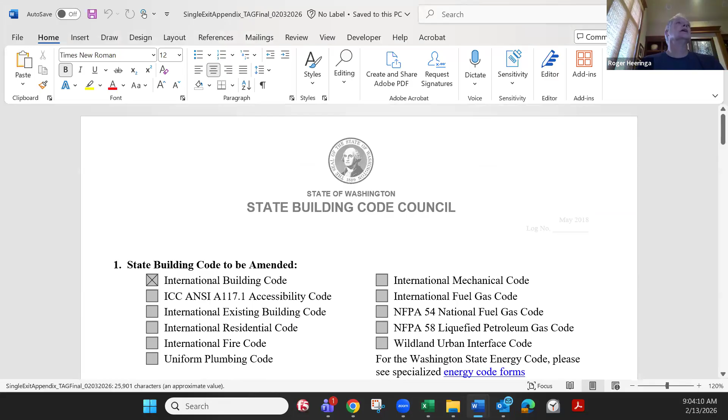All right, agenda item 4, which is the 2024 IBC single exit appendix. I have a couple of introductory comments. For those who have not been involved, it is critical that we understand that the single exit is a change to the International Building Code. The multiplex is a change to the International Residential Code. And trust me, in our TAG, there were a whole lot of conversations and people got mixed up. Everybody got mixed up at least once, if not multiple times.

So just be clear that as we talk about the single exit provisions, which will be first, that's a change to the building code. And then when we get to the multiplex, it's the residential code. Second item I wanted to do, and I just kind of wanted to get this out there, out into the public. Dustin and I did a little bit of looking back, trying to get an estimate on the number of hours that was put into the production of these two

appendices that we've proposed. And just meeting times, we went back and looked at attendance. We had roughly 100 hours of staff time in meetings, and we guessed at about 500 hours of volunteer time. That is only the time spent in meetings. I would suggest to you that the staff time in creating agendas and minutes and managing documents might very well be double that. Call it 200. That's my back of the napkin guess. And there was certainly significant time put in by some individuals outside of the meetings as well.

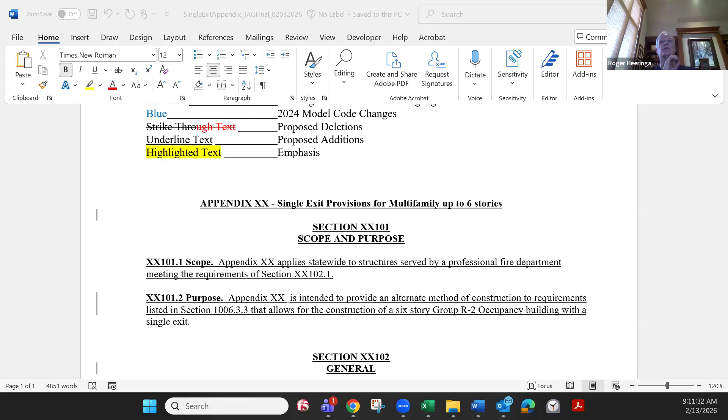So one of the things that we did is we've upgraded the sprinkler system from the residential sprinkler system, which is the NFPA 13R, to a commercial NFPA 13. So the sprinkler system is enhanced. And I'm not a sprinkler expert, but I believe there are more heads and more flow, both. So if you're going to go from 3 stories to 6 stories, you're going to need to do, call it the commercial, the 13, not the 13R sprinkler system.

We have Roger, can I ask for a clarification? When you said go from 3 to 6, it's go from 3 to 6 with a single exit, right? Yes, exactly.

We have added that there are EEROs, emergency escape and rescue openings. It's basically the window that you can break out or have access from a fire. We've required those in all sleeping rooms. There was discussion about that, but that was an upgrade.

We have the stair and elevator shafts have to be pressurized. If it's the only exit, we think you need to pressurize that shaft so the smoke does not get into it.

We have upgraded the smoke alarm and fire alarm systems to notify residents of fire in other units, particularly in the corridors. If it's the only exit and there's a fire, we think that residents need to be notified. So we've upgraded the smoke alarm and fire alarm systems.

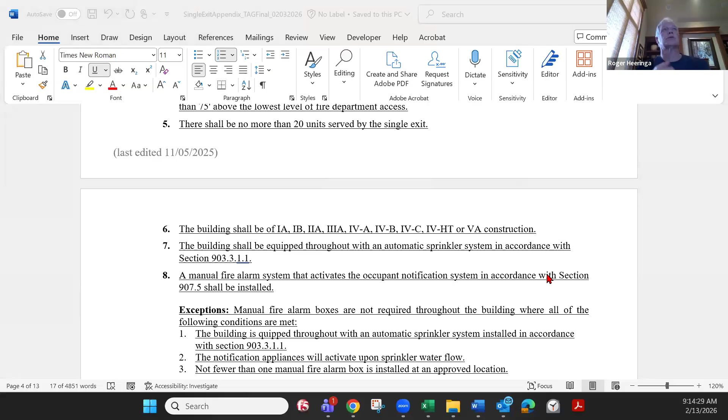So, for instance, if you are 6 stories, the first story single exit would serve the top 5 stories. We have a figure that kind of shows that. That would be 20 units. So you would have 5 stories at 4 units.

If you want to go to 4 stories served by that single exit, you can have 5 units. And to be honest, the way this is worded, if you wanted to do 3 stories, you could do 6 units if you went through the upgraded sprinkler systems, pressurization, and all of that type of stuff.

So with the purpose of the RCW to really improve or allow for infill sites to produce more units, build more units, and make it more cost effective to improve housing, we felt like giving people that flexibility at 4 stories—I think 5 stories would still not work, but at 4 stories and maybe even 3 stories—it does allow everybody a little bit more flexibility.

So that's the high level enhancements from a code perspective, and then the change that we made to where this appendix can be applied.

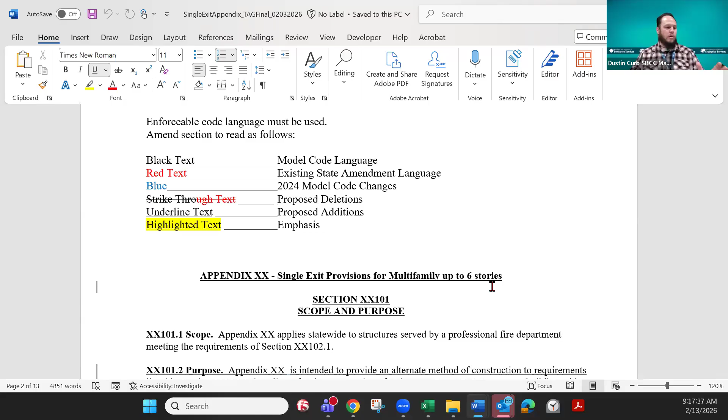You also won't see any strike-through text on this one because this is all brand new language, and any emphasis has been removed from this document. So all that you're going to see here is underlined text. There are some sections underlined as part of the draft work for insertion in the code books that'll be published. But for our purposes, underlined text represents brand new code language that we're bringing to this appendix—not for emphasis, just showing that it is new for us.

So Dustin, the document starts with the appendix, but towards the bottom there's some charging language in the code and the WAC that directs you to this appendix. Do you think it might be better to hop off there? We as a group worked with the appendix first and then developed the pointer language. I actually like the pointer language first, Dustin, it's clear in my mind.

All right, I scrolled past it. So first we have WAC 51-50-003, and you'll see the red text signifying an existing state amendment, with strikeout for the 2021 edition and new text for the 2024 edition. We are just adding a pointer here. This is where we talk about what is adopted for this WAC applicable to the International Building Code adoption in Washington. In 003, and all of the codes, it says we adopt this edition, and if there are appendices adopted for use within that text, it's mentioned here too. So at the end of this one, we are updating Appendix XX.

It's labeled XX because we're still drafting all the CR 102 stuff, and this one is going to get slotted into the best place that fits with the rest of the appendices being drafted. There are several Washington appendices, some amended appendices that Washington has amendments to that are model code text, and the appendices have been reorganized in the 2024 edition. As we're drafting this, the XX will get updated to a two-letter designation that puts it in line, most likely at the end of all the existing appendices, ready for use.

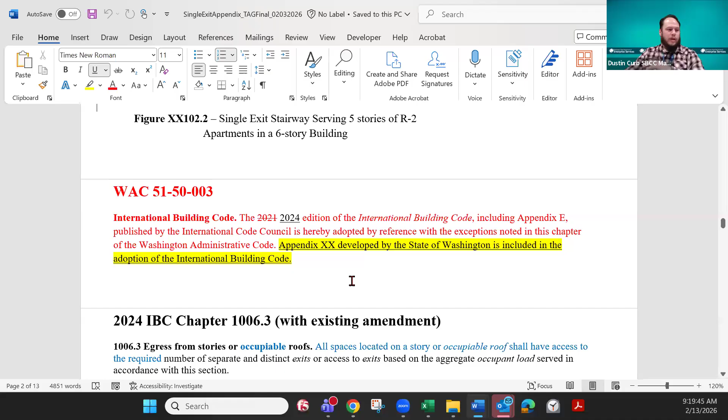So that just signifies we have this appendix available. In the main body of the 2024 IBC, chapter 1006, which is an egress chapter, we've shown the black text as model code, and the blue text showing 2024 code updates compared to the 2021 code. Most of this is left unchanged as far as model code text goes for 2024, but we get to the single exit section, where we have an existing amendment regarding the portion of the building served by the single exit.

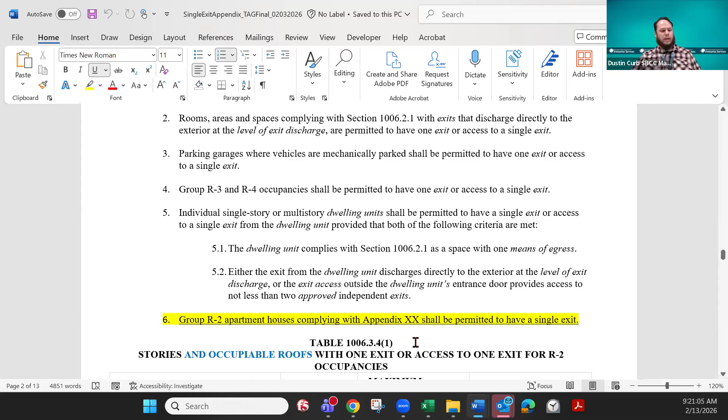This wasn't changed by the single exit multiplex housing tag, so it stays the same. The addition is a new condition, not exception, that allows a single exit if it exists. In accordance with the legislation, Group R2 apartment houses complying with Appendix XX shall be permitted to have a single exit. This is just a pointer within the building code, because this appendix is intended to be adopted for use statewide, not as an optional local adoption. So if you have the condition of Group R-2 apartment houses, you'll be allowed to design per Appendix XX if you choose. The remainder of 1006 is included for discussion among the tag, but there's no further modification within IBC 1006.

We also have the same text in the 2024 IFC. We have the existing state amendment for condition number 1, and similarly we've added condition number 6, which just points to the International Building Code Appendix XX for single exit. This is just a correlation - the exiting and several other chapters within the IFC and IBC are identical, so if we have amendments in one, it's prudent to bring them across in both texts.

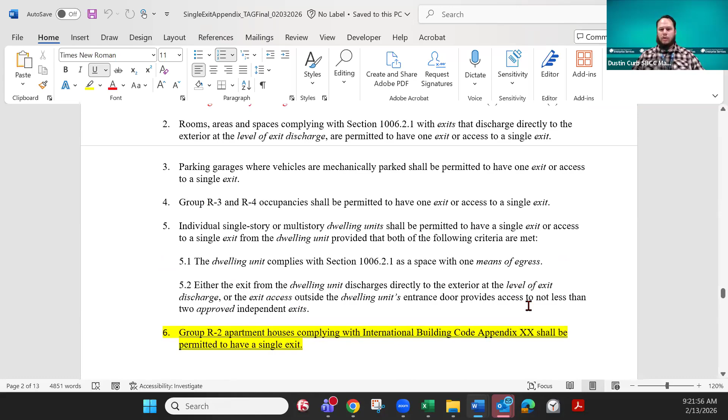And those are the priming language and pointers within the main body of the code. Now I'm going to hop back up to the top of our document and start at the beginning of the appendix.

So we have section XX101, which is the scoping and purpose of this one. There was discussion about user notes and things like that - they typically are placed before chapters or appendices, but it was thought more prudent to bring language from those into the actual code text, since user notes are considered commentary and not necessarily enforceable. So we brought that language down into scoping, and it's filtered into a couple other sections as well. There are folks on the call, so if I missed something, please raise your hand - I'm trying to keep an eye on that too. But we brought user notes into the main body to make it all enforceable language.

So looking at the scope, you'll notice that 101.1 Appendix XX applies to structures served by a professional fire department meeting the requirements of 102.1. That is one of the key things we talked about, had lots of discussion on, was professional fire departments and what that means. We talked about different methods and metrics to apply to those fire departments to make sure we'd get the level of service needed to respond to an emergency in a structure of this type of design. We'll get to what those criteria are in section 102.

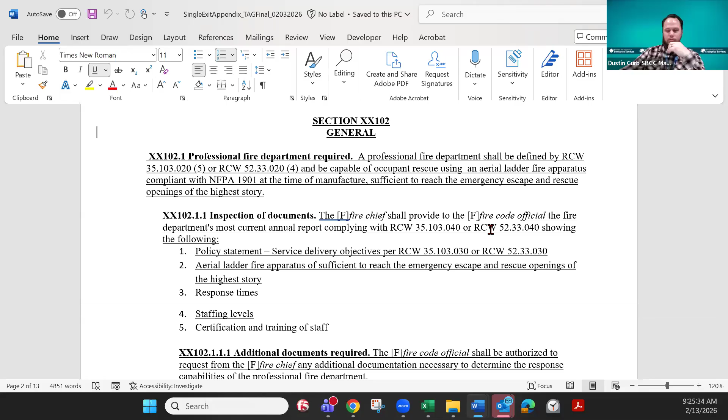When I hear aerial ladder apparatus, sometimes I mistakenly think it's probably a helicopter or something coming in. But correct me if I'm wrong, any of the fire guys on this call, an aerial ladder is just a ladder truck that you used to see in the cartoons. It might have two drivers, one driving the back and the front, but this is capable of getting you to that sub high rise level of rescue in a building. Is that accurate? I see no hand. Awesome, thank you.

As far as being a professional fire department, there are documents that show this to the state, and we have some documents that the local fire code official would be seeking from a fire chief who is responsible for conducting emergency operations in the territories of construction like this. So we have policy statements capable of having the aerial apparatus available within proper times of these structures, appropriate staffing levels, and certification and training of staff.

If upon submittal of all those documents there might still be a question by the fire code official, additional documents are available to be requested, and those are left to the discretion of the fire chief and the fire code official to work out, to make sure the level of safety is maintained. I think the big concern here is that if the fire department is unable to respond to a structure designed like this, significant loss of life and property can occur. So we want to make sure we're able to respond appropriately.

I'm seeing some shifting stuff.

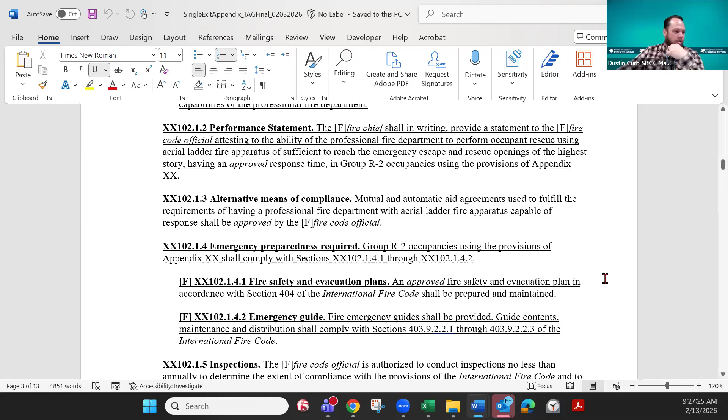In here we have more about the documents, the performance statement, alternative means of compliance. So we talk about mutual automatic aid agreements. If a local jurisdiction isn't capable and they have an agreement in place to bring resources from outside of their immediate area that can respond as appropriate, that's okay, as long as everybody's confident that the need is met.

There's inspections in here. The fire code official is authorized to conduct inspections no less than annually to determine extent of compliance with these provisions. If some of these exit ways are blocked by stuff put in the hallways by residents, trash pickup, etc., it could lead to reduced egress pathways and increased egress times. Maintaining these buildings in a safe manner is prudent as well, so inspections are authorized by this appendix.

Then we get to the single exit in a group R-2 apartment house. In addition to the means of egress requirements of Chapter 10, not more than 5 stories of group R2 apartment houses are permitted to be served by a single exit under the following conditions.

This is where the bulk of the design considerations are spelled out for what is needed in a single exit building. We've touched on number 1, the building has not more than 6 stories above grade plane, and we have a user note in here to clarify that further.

The 5-story limitation in section 102.2 does not prohibit an R2 apartment occupancy from being located on the first story of a 6-story building. For a 6-story building with a single exit stairway, the R2 apartments or other occupancies are permitted on the first story, provided the required means of egress for the occupancies do not commingle with the ones coming down from the levels above.

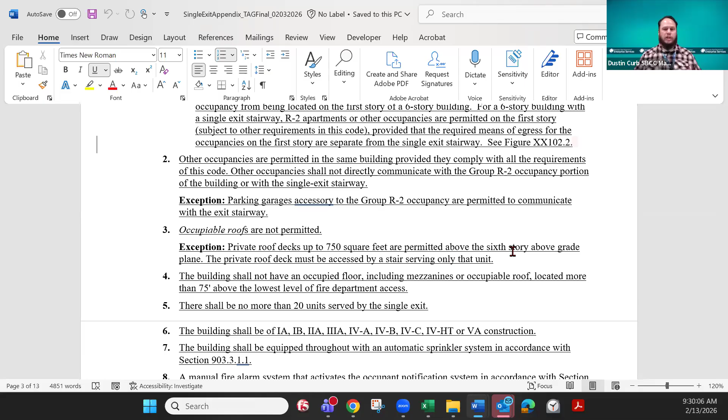Number 4, the building shall not have an occupied floor, including mezzanines, or an occupiable roof located more than 75 feet above the lowest level of fire department access. This is a prohibition on high rises and is where that aerial ladder apparatus threshold lies.

So if you go above this, the ladder trucks can't get to you. And I guess you're using the old jump out the window and trampoline tactic if you have to, but we're not allowing that.

The building shall be equipped throughout with an automatic sprinkler system in accordance with section 903.3.1.1. For those who might not know, 903.3.1.1 is the NFPA 13 sprinkler system that Roger was mentioning earlier.

With this one, I believe you can go higher in the building. You get better coverage with the sprinkler heads as compared to the 13R systems, which were the second option discussed for these buildings. Making sure I didn't mess anything up on that sprinkler statement from the fire folks.

All right, seeing no hands, I will assume that it's a good one. So the manual fire alarm system that activates the occupant notification system shall be installed. This is an upgrade as compared to what would be allowed in a 2-exit building of the same size and height. They're not required throughout the building where all the following conditions are met.

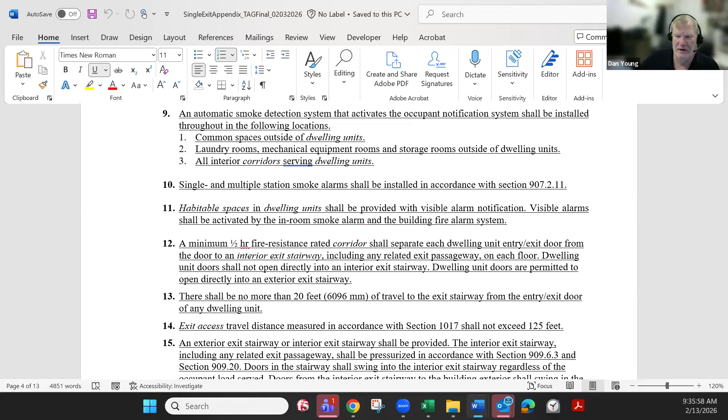Yeah, it allows for a lot of other trade-offs. Yes, very good clarification. Thank you.

Give me one moment, just updating some notes. All right.

Looking forward, number 10: single and multiple station smoke alarms shall be installed in accordance with 907.2.11. Number 11: habitable spaces in dwelling units shall be provided with visible alarm notification. Visible alarm shall be activated by the in-room smoke alarm and the building fire alarm system. This is an upgrade to bring more awareness by occupants of these buildings to potential emergent situations.

Number 12 is talking about corridor protection. A minimum half-hour fire resistance rated corridor shall separate each dwelling unit entry exit door from the door to an interior exit stairway, including any related exit passageway on each floor. Dwelling unit doors shall not open directly into an interior exit stairway, but are permitted to open directly into an exterior exit stairway. This is just talking about corridor protection.

There shall be no more than 20 feet of travel to the exit stairway from the entry exit door of any dwelling unit. This prevents overly long corridors to travel to the protected exit stairway shaft, gives plenty of occupant time to get there, and shouldn't lead to dead end corridors as well.

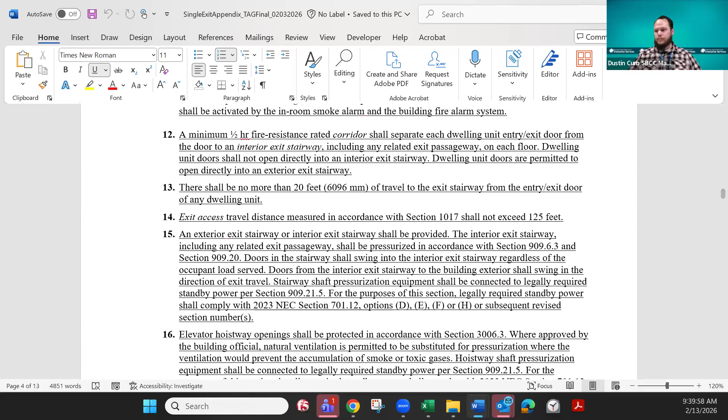So this legally required standby power brings some redundancy to the operation of the smoke pressurization system to ensure that exit shaft remains clear. It creates that pressure differential within the shaft of a higher pressure that when the doors open, it should also help close those doors. But when they are open, air will escape from the passageway, pushing smoke and other contaminants in the air out.

Elevator hoistway openings shall be protected in accordance with section 3006.3. Where approved by the building official, natural ventilation is permitted to be substituted for pressurization where the ventilation would prevent the accumulation of smoke or toxic gases. Hoistway shaft pressurization equipment shall be connected to legally required standby power per 909.21.5. For the purpose of this section, legally required standby power shall comply with 2023 NEC sections that were listed earlier.

So where the elevators come down and you have the hoistway opening and closure, those are required to be protected as well to prevent undue exposures to the exit passageway. The exit serving the Group R occupancy shall not discharge through any other occupancy, including an accessory parking garage. So the parking garage is allowed to communicate, but you're not allowed to discharge through the parking garage to the public way, ensuring that you don't get trapped in other places where you're trying to egress through.

The exit shall not terminate at an egress court where the court depth exceeds the court width unless it is possible to exit in either direction to the public way. This just ensures that if you come out in a slightly confined space, that you still have adequate egress capacity to get to the public way.

Openings within 10 feet of an exterior exit stairway or non-rated exterior walls of the interior exit stairway enclosure shall be protected by opening protectives having a fire protection rating of not less than 3/4 hour. This is just to protect the exit stairways from adjacent exposures that might occur with building configuration. And then emergency escape and rescue openings shall comply with section 1031 and shall be provided in all sleeping rooms on all floors served by the single exit.

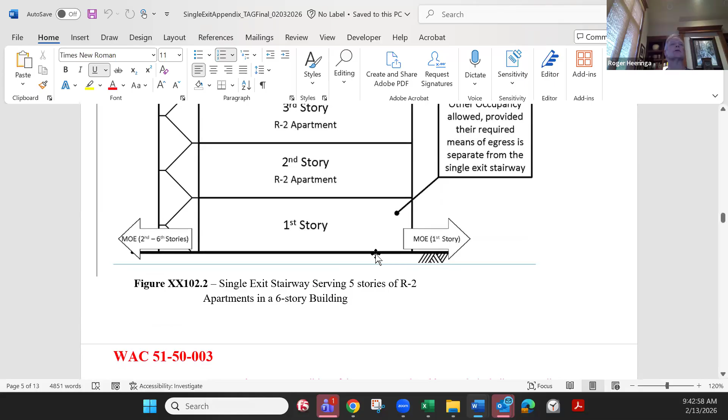Dustin, the note on the right, I might mention as well, there was conversation on the enforcement side of is it clear that you can have residential units on the 1st story, or is it interpreted that this is a podium with no residential on the lower level? That was not the intent. So we very clearly said that R2 apartments or other occupancies are allowed. So just wanted to make it really clear that R2 apartments are allowed on the 1st story.

And John Sue, you have your hand up? Yeah, and there's a user note further up that kind of points to this figure that tries to explain the same thing in words. And this points to figure XX102.2. Yeah, and as Roger said, there was some concern about, does this mean I can't have apartment units on the ground floor? And the idea is, yes, you can, but they have to exit separately. So they can't use that single exit as their required exit. Yep.

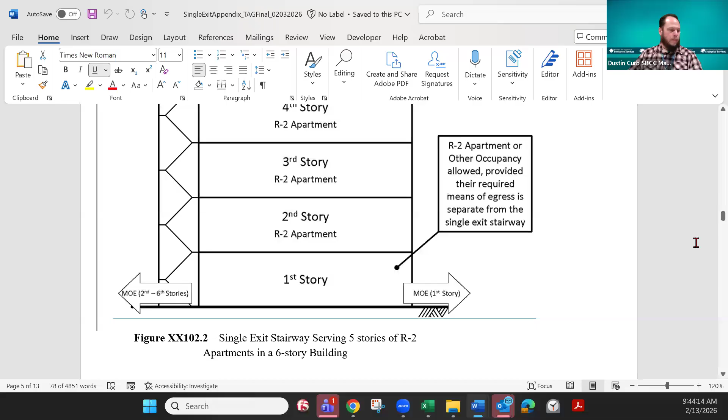And that does, I believe, bring us to the end of the proposed new appendix for the building code. We went over the WAC 51-50-003 and the changes proposed there, and the proposed changes in the IBC Section 1006 and IFC 1006 as well.

Scott. I think I know the answer, but I'm going to ask it anyway. So on the ground floor, secondary exit still could not exit into the stairwell, correct? Correct. Okay. If I can answer that, if it's a required exit, it doesn't mean you can't communicate with it. You can have a door that goes into the stair on the ground floor. It's just that it can't be the required exit for that ground floor. Thank you, John.

Todd? Thank you. Just for the purpose of the meeting, can someone just quickly walk through how one with a couple of the likely construction types would achieve that sixth floor and horizontal separation and so forth? There are many. I mean, I think that the standard one, the standard, Roger, I'm sorry. I guess the question is, are there any special provisions that are different than the base code?

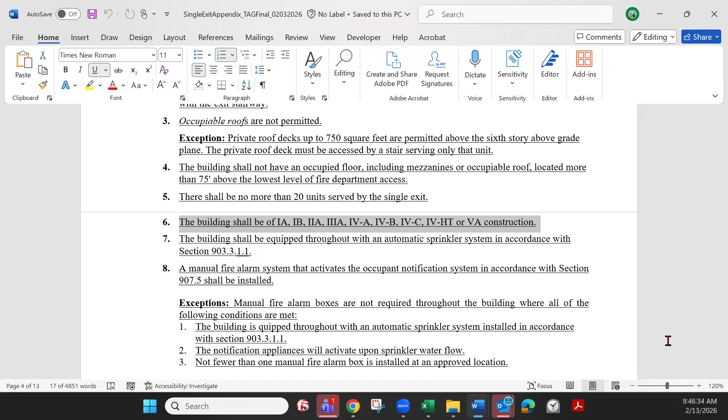So again, you asked about what are some types. I think everybody, particularly at the beginning of the process, thought of this as a one-story concrete podium with 5 levels of wood on top. But there is a lot of conversation about, well, we could use different systems, certainly mass timber, cold-formed steel. There are different construction types that could be used for this. So that's where we came up with this list of allowed construction types. And somebody also have to help me with what we excluded. But those that we excluded were pretty clear.

But a 2-hour horizontal separation was never discussed? No, no. Okay. That would be per code. And John, you raised your hand. If you could help answer. Yeah. In answer to your question, Roger, what was excluded were type 5B, type 3B, and I think 2B. Those are basically non-rated types of construction. We wanted to make sure there was at least 1-hour rated construction in the building. But everything else is, you just go back to base code provisions.

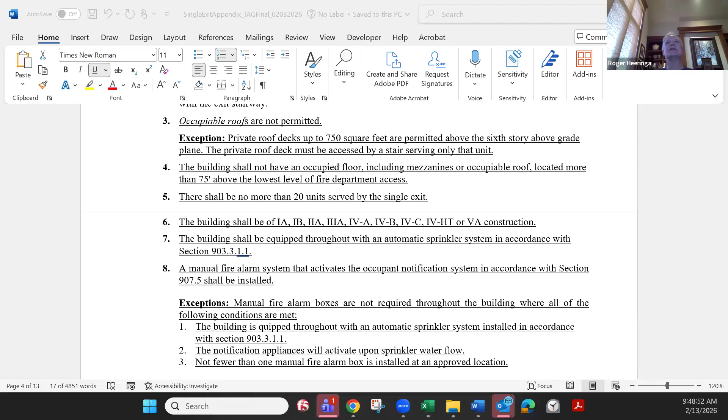Attendee. Ken, go ahead. Could you scroll up to 102.1.1, number 2? I just think that you need an editorial cleanup on that. Either get rid of the word of or put sufficient aerial ladder apparatus to reach, something like that. But number 2 just doesn't flow correctly. So you would propose to remove that of? The simple aerial ladder fire apparatus sufficient to reach. Yeah, you could say sufficient aerial ladder fire apparatus to reach. So either one, but I just think this needs to get cleaned up. That seems like a reasonable grammatical edit. Anything else?

Well, then I would be ready to ask for a motion to move this on to the full council for consideration. I'd like to make a motion to move this as presented to the full council. Thank you, Nan. Second. Who is the second? Me, Scott. Thanks, Scott. Any further discussion? I will clarify, this will move on to the full council and then it will go into the CR 102. So there will still be an opportunity for full public comment on the proposal. Any other discussion? All those in favor say aye. Aye. Aye. Any opposed? Okay, motion passes.

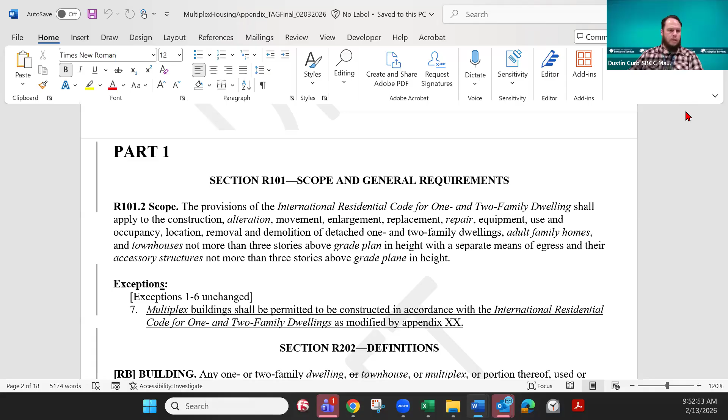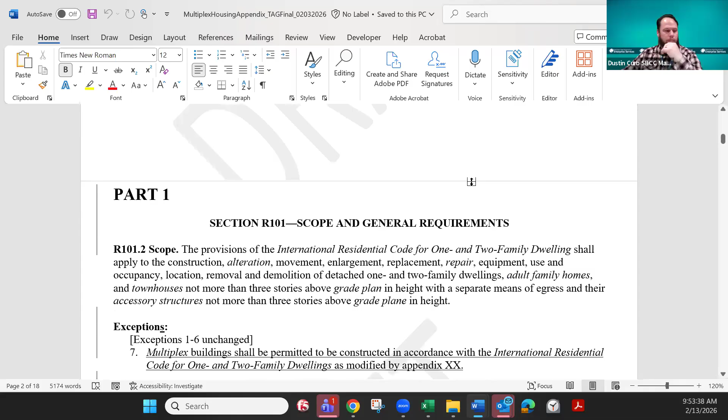I think, Dustin, maybe we jump right into it. Okay. And let me start with our pointers to the appendix first again. Well, maybe we don't have them. So we've been working on pointers for stuff out of the building code as well, or the building code TAG. So I might have conflated that a little bit. All right. So Appendix XX, multiplex buildings. This is intended to provide... John, go ahead. Sorry, Dustin, the pointers are in part 1 above. Oh, thank you, John. I missed it completely.

All right, so part 1, section R101, scope and general requirements. We have a change to the 101.2 main body code language, just bringing in a new exception, which allows that multiplex buildings shall be permitted and constructed in accordance with the IRC for 1 and 2 family dwellings as modified by Appendix XX. Once again, Appendix XX is just a placeholder for the final lettering, number, name that we're looking for on this drafting.

Within the main body of the code, we amended one definition and added another. So the definition of building adds multiplex into that definition. So any 1 or 2 family dwelling or townhouse or multiplex or portion thereof intended to be used for human habitation for living, sleeping, cooking, or eating purposes, or any combination thereof, or any accessory structure. And then a multiplex is defined: a building of up to 3 stories containing 3 to 6 dwelling units consolidated into a single structure with common walls and floors. And those are all the pointers we have in here.

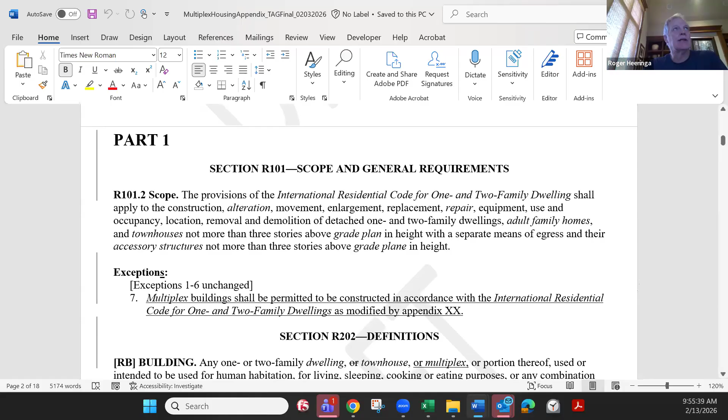I do suspect that a WAC 51-51-003 amendment should be considered. We do have some sections in the code that talk about where we would place this appendix as available for local adoption. This one's not mandatory across the state, if I recall correctly. Is that right, Roger? No, it is mandatory across the state. Okay. Then that's my bad. I think in the conversation that we had, we felt like if these changes are made to the IRC, that is clear enough that it allows statewide, you can build these on the IRC. Okay. Then I will move forward from there.

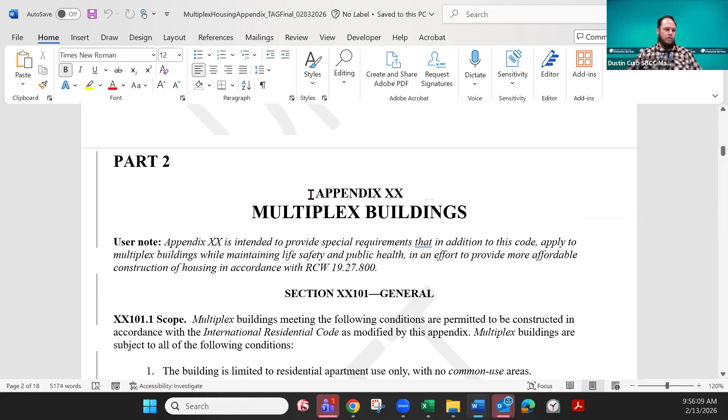Getting into part two, the actual appendix language. We have a user note on this one. This one's intended to provide special requirements that, in addition to the base model code, apply to multiplex buildings while maintaining life safety and public health in an effort to provide more affordable construction of housing in accordance with RCW 19.27.800, which is the location of the bill that passed that directs the SBCC to create this multiplex appendix.

Getting into section XX101 for scope. Buildings meeting the following conditions are permitted to be constructed in accordance with the IRC as modified. Multiplex buildings are subject to all of the following conditions. The building is limited to residential apartment use only with no common use areas, with an exception that common use areas used for means of egress, bicycle parking, mail packages, shared laundry, or trash bins are permitted where such areas are separated from the rest of the building in accordance with XX103.3 or 104 as applicable. The total floor area of the building shall not exceed 8,000 square feet.

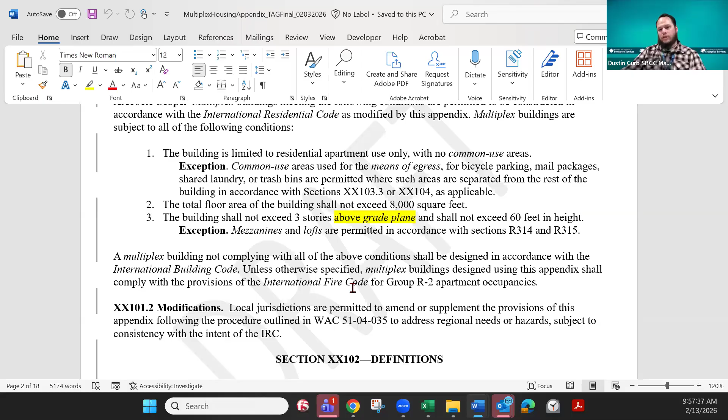The building shall not exceed 3 stories above grade plane and shall not exceed 60 feet in height, with the exception that mezzanines and lofts are permitted in accordance with sections R314 and R315. And Roger, correct me if I'm wrong, I think since we don't have the egress type requirements from the International Building Code that we're bringing into this one, the square footage limitation was kind of where we addressed the egress travel distance on this one. Yes. Okay.

And then further, a multiplex building not complying with all of the above conditions shall be designed in accordance with the International Building Code unless otherwise specified. Multiplex buildings designed using this appendix shall comply with the provisions of the International Fire Code for Group R2 apartment occupancies. So if you're trying to build in the IRC and you can't build per the model code, you might come to this appendix to build something that is that bridge between IRC and IBC requirements. And if you can't build that building in accordance with this appendix, then you're kicked into the IBC for the full requirements.

Modifications. Local jurisdictions are permitted to amend or supplement the provisions of this appendix following the procedure outlined in WAC 51-04-035 to address regional needs or hazards, subject to consistency with the intent of the IRC. This does allow local control over this, but since it does impact residential construction, a notice to SBCC would be required, and approval of the ordinance changing this code text would need to be approved by SBCC before being enforceable within the jurisdiction according to this WAC.

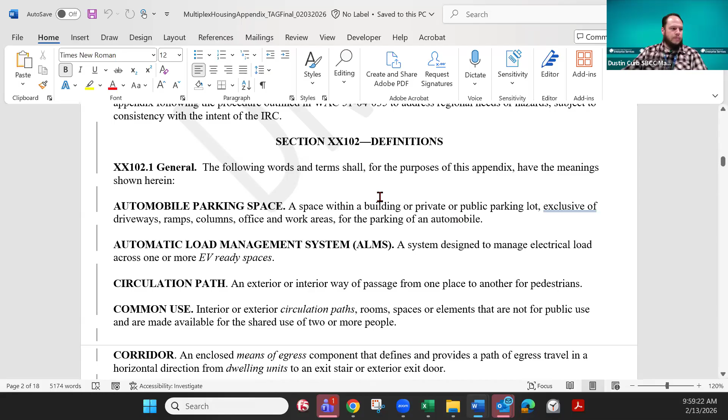All right, we have some other definitions that we're bringing into this appendix, which bring more alignment with the International Building Code, and that's why they're in the appendix instead of the main body of the code. So these terms are only applicable within this appendix. We have a definition for automobile parking space, added for some clarification of electric vehicle charging requirements. We have automatic load management systems, similarly brought in for electric vehicle charging. We have circulation path, which is an egress component definition. We have common use, which talks about circulation paths and is also a component of our egress pathways out of these buildings. We have the definition of corridor added in here.

And correct me if I'm wrong, but these are just brought over from the building code in here, except for the electric vehicle charging ones. Roger? No, we did amend the corridor and exit passageways. A lot of the ones dealing with exits, because we were trying to get it into simpler language and something that would be more applicable to these multiplex buildings. Gotcha. Thank you.

I also would just point out, at the high level, a building out of the IBC of this size would be required to provide EV charging. IRC buildings don't have much requirement for electric vehicle charging, so we arrived at something within this that is kind of in between the IBC and the IRC. We certainly felt like it meets the intent of the RCW. I don't remember the number for electric vehicle charging.

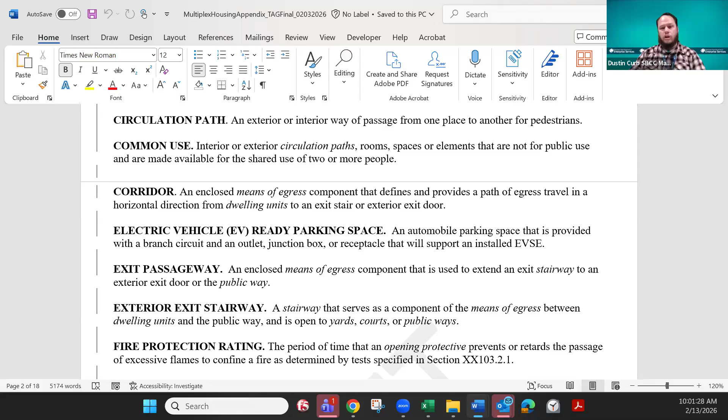I'm not going to start spouting them off from memory, I'll get it wrong too. But suffice to say that what you said was accurate. The IRC EV charging requirements are really only applicable if you have an attached garage or an attached carport. So if you just had street parking or parking lot parking, and this was strictly built per the IRC provisions, you would get no EV charging infrastructure with these buildings. And like Roger said, we feel that requiring something is in alignment with the statute to require EV charging in the building codes.

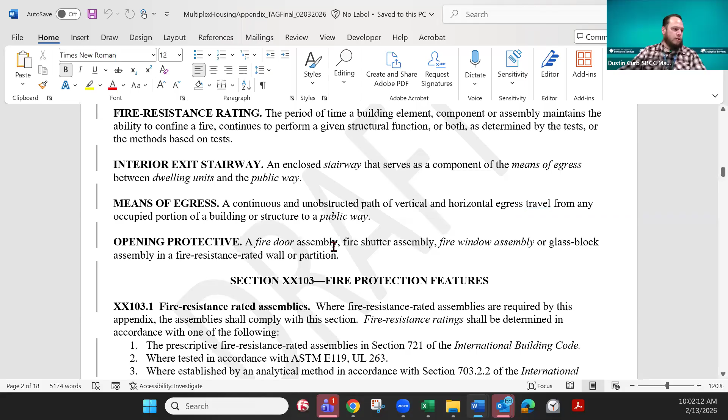All right, we have the EV ready parking space, another electric vehicle charging one. We have exit passageway, exterior exit stairway, fire protection rating, fire resistance rating, interior exit stairway, means of egress, and opening protective. These definitions were felt as needed to make sure that the clarity of the text contained in this appendix is there for code users. So these definitions help everybody get there.

Getting into section XX 103, fire protection features: we have fire resistance rated assemblies. Where fire resistance rated assemblies are required by this appendix, the assembly shall comply with this section. The rating shall be determined in accordance with one of the following: a prescriptive fire resistance pathway through section 721 of the IBC, where tested in accordance with ASTM E119 or UL 263, or where established by an analytical method in accordance with 703.2.2 of the IBC. The continuity and supporting construction are required to maintain the fire resistance rating for the assemblies and stuff supported by the construction, and be continuous to the exterior walls of the building.

Opening protectives and smoke draft control assemblies required by this appendix shall comply with this section. The fire protection ratings for opening protectives are in accordance with NFPA 252 or UL 10C and shall be labeled. Smoke and draft control shall be tested in accordance with UL 1784 and shall be labeled.

Dwelling unit and common use area separations. Dwelling units shall be separated from each other by wall and floor assemblies having not less than a 1 hour fire resistance rating. Common use areas shall be separated from other portions of the building by wall and floor ceiling assemblies having not less than a 1 hour fire resistance rating.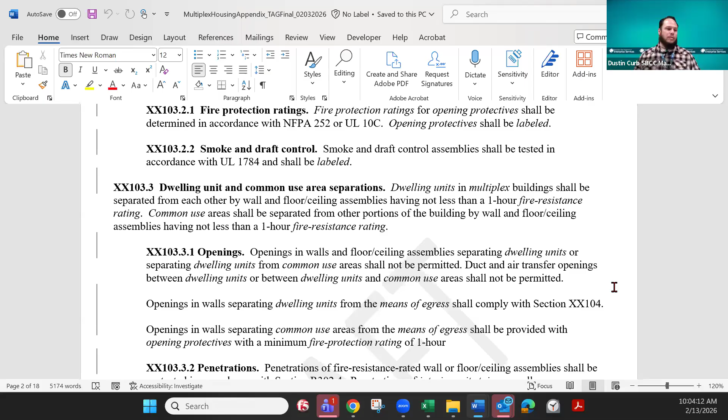This brings into the code requirements similar separations that are contained within the building code. In most dwelling units, even duplexes and townhouses have a resistance assembly in between them, but because these can be both side by side and on top of each other, we needed some additional clarification.

Openings in walls and floor ceiling assemblies separating dwelling units, or separating dwelling units from common use areas, shall not be permitted. Duct and air transfer openings between dwelling units, or between dwelling units and common use areas, shall not be permitted.

Openings in walls separating dwelling units from the means of egress shall comply with section 104. Openings in walls separating common use areas shall be provided with opening protectives with a minimum fire protection rating of 1 hour. Penetrations shall be protected in accordance with R302.4, and penetrations of interior exit stairways shall also comply with 104.4.2 of the appendix.

Multiplex buildings shall be equipped throughout with an NFPA 13R automatic sprinkler system, consistent with section 903.2.8 of the IBC.

Should I pause there for a discussion on the 13R versus anything else we were talking about? In the IRC, some buildings need to be sprinkled but many do not. What we're saying is if you're going to do the multiplex, you shall use a 13R system. We tried very, very hard to not direct to building code, because the intent is that this is all built out of the IRC, for those people that are used to building out of the IRC. But in this case, we felt like the sprinkler system, the NFPA 13R, that's where all the information is contained.

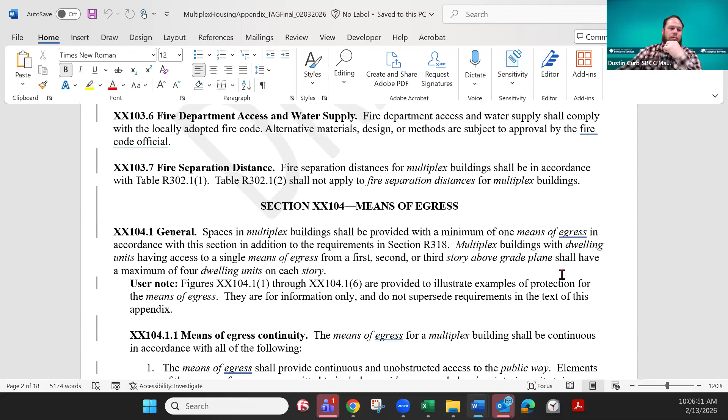Fire separation distance for multiplex buildings shall be in accordance with table R302.1 number 1 and 302.1 number 2. They shall comply with 302.1 number 1. Table 302.1 number 2 shall not apply for multiplex buildings.

Any other questions on fire separation or fire protection? Not seeing any hands. Getting into means of egress.

Generally, spaces in multiplex buildings shall be provided with a minimum of one means of egress in accordance with this section. In addition to the requirements in section R318, multiplex buildings with dwelling units that have access to a single means of egress from a first, second, or third story above grade plane shall have a maximum of 4 dwelling units on each story.

With a user note, figures XX104.1 number 1 through XX104.1 number 6 are provided to illustrate examples of protection for the means of egress. They are for information only and do not supersede requirements in the text of this appendix.

Dustin, I think jumping down, is that what you're going to do? Yes, sir, showing people those figures is helpful. So let me zoom out just a little bit so we can see them fully.

This figure 104.1 number 1 is an unseparated building with interior or exterior stair. John, you were the drawer of these figures, maybe you can lead us through exactly what they're showing between them, a little bit more succinctly than I can.

This is just an illustration of upper stories, the second and third stories, assuming there's 2 units on each story. The case here is that the units open directly into the stair. This shows what the wall and opening ratings are supposed to be in that case, the separations and protection of that stairway.

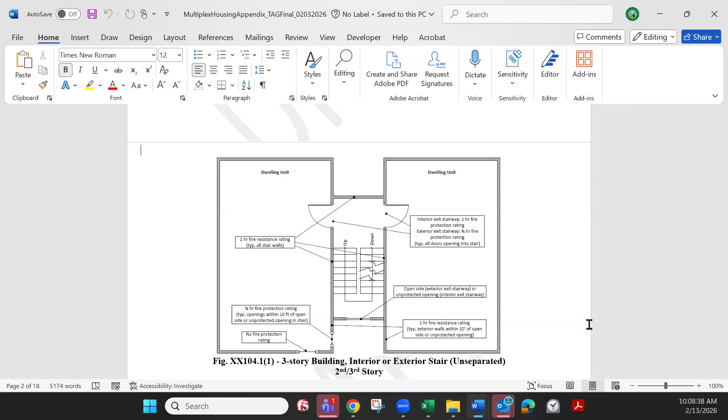Again, that's the upper stories. This one is a ground story.

If you open right directly to the outside, there's no separation. You've got an exterior stair, and you can again take that exit path directly out from the building. Again, this shows you what fire protection and opening protection ratings are required.

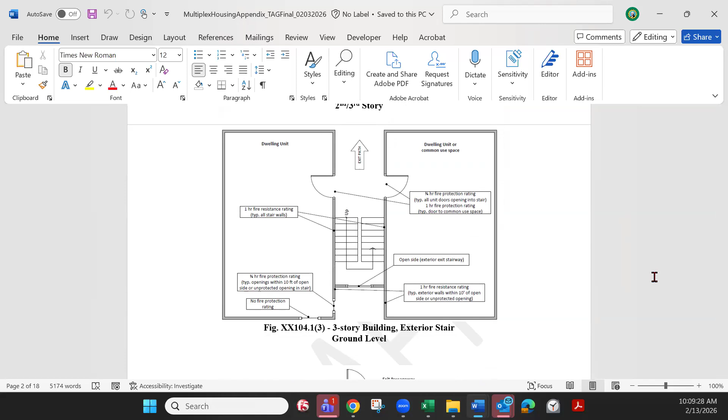We do have an exception if you're only a two-story building, and you could have more than 2 units. The idea is you're allowed to do a direct exit out without as much protection as you would in the 2 or 3 story cases above. You're allowed reduced 20-minute protection for your smoke and draft controlled openings and the doors from the units, and only half-hour fire resistance rating. For those familiar with the building code, this is essentially corridor construction.

And similarly, even if the exit way is enclosed, as shown here, if it's only 2 stories, you're still allowed to have these reduced protections. Corridor construction, basically.

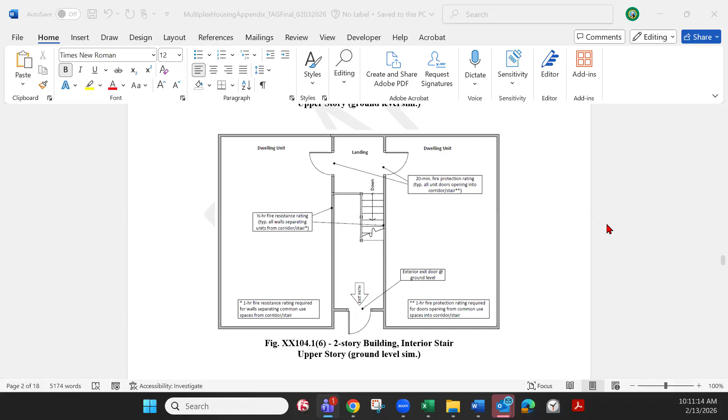That's it. And we have language, hopefully, that corresponds to these. Yes, we have language that does correspond, John. Not hopefully. We tried. Yes, I know.

What I wanted to point out again at the 10,000 foot, 5,000 foot level, no corridor information really is in the IRC, or little. I'm not going to say no, but little information is in there, because you don't have, even in a duplex, you're not typically going into a corridor. So we had to add a whole lot of that.

There's conversation about proper interpretation of code language, which is not always easy to do, particularly with window fire ratings and that kind of stuff. So we really felt like having the exact language in the text, but then providing these figures, would be very helpful for the usability of this appendix.

John, go ahead. If I may add, the whole point of this section 104 means of egress is because, as Roger pointed out, the IRC does not contemplate shared exit paths. And so we had to put in a lot of things to protect that exit path.

Okay, Dustin. All righty. So we're past the general and the user note. Means of egress continuity shall be continuous in accordance with all of the following. I think most of this is familiar to folks familiar with the IBC, but it provides continuous and unobstructed access to the public way. Elements are permitted to include corridors, egress balconies, interior exit stairs, exterior exit doors, or a combination of those elements. The path of egress travel along a means of egress shall not pass through any other rooms or uses.

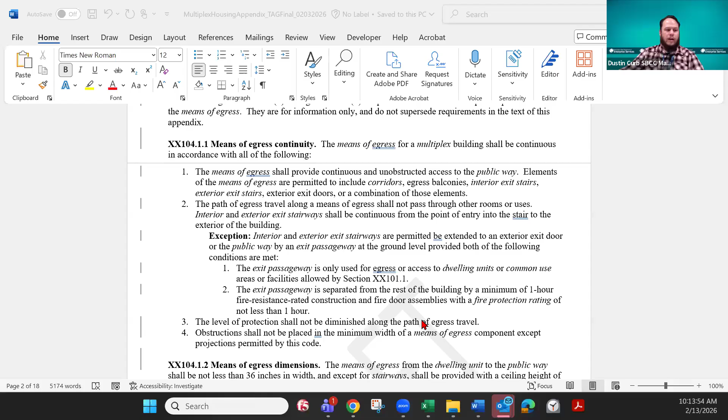The level of protection shall not be diminished along the path of egress travel, and obstructions shall not be placed in the minimum width of a means of egress component, except projections permitted by this code.

And one difference when we're talking about egress travel, there's no fire department inspections on these. Is that accurate? So there's no maintenance by the local jurisdictions. Once these are built, it's the occupants who are maintaining that egress path of travel. Occupants or building manager. Or building manager, yes.

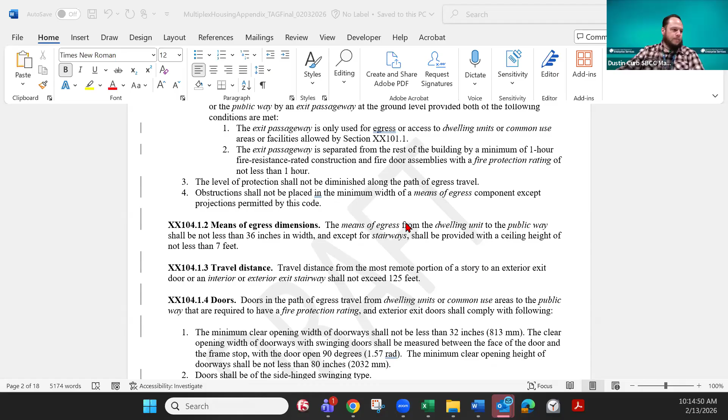Egress dimensions from the dwelling unit to the public way shall not be less than 36 inches in width, which is similar to an IRC hallway, except stairways shall be provided with a ceiling height of not less than 7 feet. Travel distance from the most remote portion of the story to an exterior exit door or an interior exit or exterior exit stairway shall not exceed 125 feet.

Guess I was a little bit remiss in saying that that was the only limitation to the 8,000 square feet per floor, or per building, was not limited by exit travel distance. We still have that 125 feet in there.

Doors in the path of egress travel from the dwelling units or common use areas to the public way that are required to be protected shall comply with the following: clear width of 32 inches with the door in the open position, doors shall be side hinged, swinging type. The operational force to operate the door shall not exceed 15 pounds, and shall not exceed more than a 30-pound force to be set in motion and moved to a full open position when subject to not more than a 15-pound force. There should be a floor or landing on each side of a door at the same elevation on each side of the door.

Exception: landings at exterior exit doors are permitted to be not more than 7 inches below the landing on the egress side of the door, provided the door does not swing over the landing. Landings at doors shall have a width of not less than 3 feet, and doors in the fully open position shall not reduce a required dimension by more than 7 inches.

Thresholds at doorways shall not exceed a half inch above the finished floor. Doors required to have a fire protection rating shall be self-closing and provided with an active latch that will secure when the door is closed.

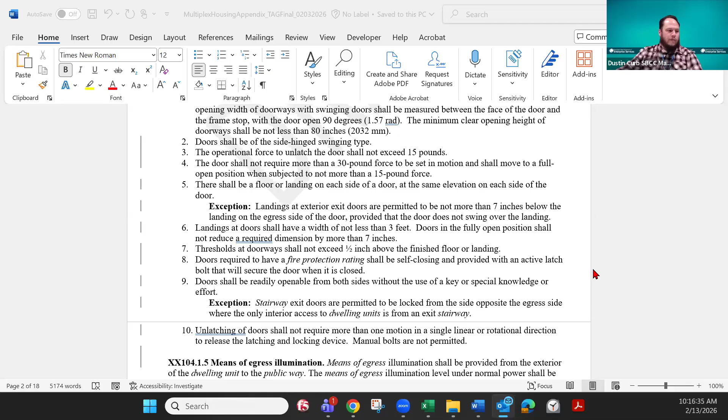Doors shall be readily openable from both sides without the use of a key or special knowledge or effort, with the exception being a stairway exit door is permitted to be locked from the side opposite of the egress side, where the only interior access to the dwelling units is from an exit stairway.

Unlatching of doors shall not require more than one motion in a single linear or rotational direction to release the latching and locking device. Manual bolts are not permitted.

Seeing no hands, keep going.

Means of egress illumination shall be provided from the exterior of the dwelling unit to the public way, and shall be under normal power, shall be not less than 1 foot candle at the walking surface. And at other places of more hazard shall be not less than 10 foot candles at the walking surface.

Slip-resistant surface: the means of egress from the dwelling unit to the public way shall have a slip-resistant surface and be securely attached. Guards along walking surfaces and egress components shall comply with Section 312, except the guards adjacent to the means of egress shall have a minimum height of 42 inches, and that is an addition to the residential code.

I believe the guard height in the residential code is 36 inches, not 42. Correct me if I'm wrong.

Maintenance: the means of egress shall be maintained in a manner that does not reduce the minimum width or protection of the means of egress to less than required by this appendix. We get down to the figures we already went over.

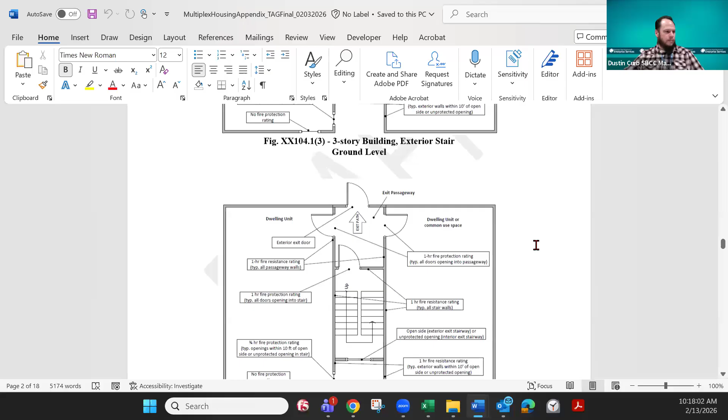We have corridors and exterior egress balconies. Corridors and egress balconies used for egress purposes shall comply with this section. Corridors shall have a minimum width of 36 inches and shall be limited to 20 feet in maximum length. Corridors shall be protected not less than a half hour, and openings shall be protected by smoke and draft control with a one-third hour fire protection rating, with an exception being exterior walls and corridors are permitted to be unrated where a fire separation distance greater than 10 feet is provided.

Egress balconies used for egress purposes shall conform to the same requirements as corridors for minimum width and length. The balcony shall be separated from the interior with opening protectives by walls and opening protectives as required for corridors.

Openness: exterior egress balconies shall be a minimum of 50% open, and the open area above the guard shall be constructed to minimize the accumulation of smoke. So no reverse parapet walls that would trap some smoke curling around in there.

Location: exterior egress balconies shall have a minimum fire separation distance of 10 feet measured at right angles from the exterior edge of the balcony to the following: either the adjacent lot line or other buildings on the same lot.

Exit stairways. Interior and exterior exit stairways shall comply with this section. Winders, spiral stairways, alternating tread devices, ship ladders, or other ladders are not permitted in an interior or exterior exit stairway.

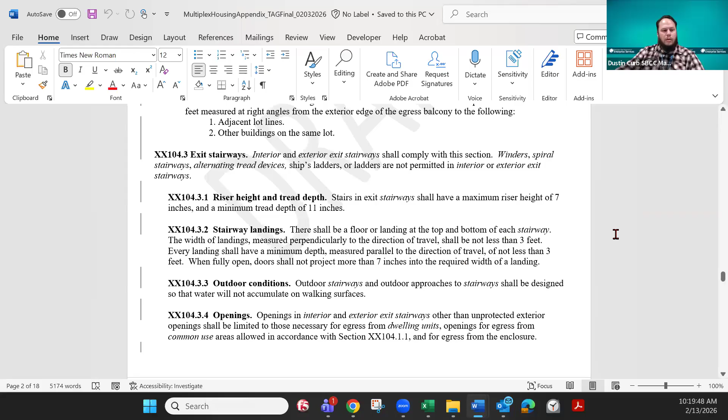The riser height and tread depth shall have a maximum riser height of 7 inches and a minimum tread depth of 11 inches, which is in alignment with the IBC stairway requirements instead of the IRC requirements.

Stairway landings shall be a floor or landing at the top and bottom of each stairway. The landing shall be measured not less than 3 feet perpendicular to the direction of travel, and minimum depth measured parallel to the direction of travel and not less than 3 feet. So a 3x3 square. When fully open, doors shall not project more than 7 inches into the required width of a landing.

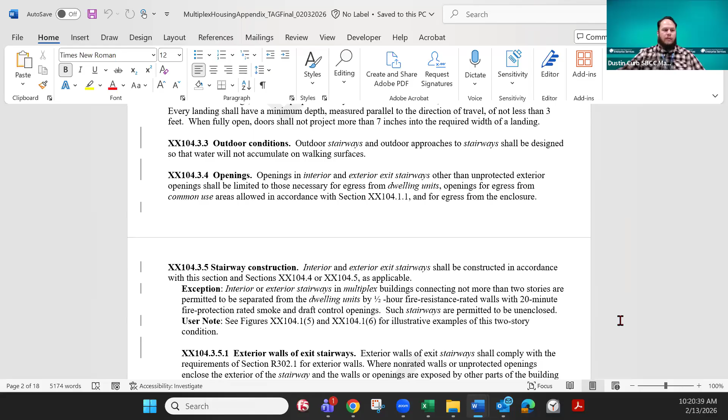Outdoor stairways and outdoor approaches to stairways shall be designed so that water will not accumulate on walking surfaces. Openings in the interior and exterior exit stairways other than unprotected exterior openings shall be limited to those necessary for egress from dwelling units, openings for egress from common use areas allowed in accordance with XX 104.1.1, and for egress from the enclosure.

Stairway construction shall be constructed in accordance with this section, and they shall not connect more than 2 stories, and shall be separated from the dwelling units by a half-hour fire resistance rated wall with 20-minute rated smoke and draft control openings. Such stairways are permitted to be unenclosed, with figure XX 104.1(5) and XX 104.1 number 6 illustrative of this example condition. We went over those figures earlier.

Exterior walls of exit stairways shall comply with the requirements of R302.1, where non-rated walls or unprotected openings enclose the exterior of the stairway and the walls or openings are exposed by other parts of the building at an angle of less than 180 degrees.

Building construction within 10 feet of the exterior walls of the exit stairway shall comply with XX 104 as applicable.

Interior exit stairways serving as an exit component and a means of egress system shall comply with the requirements of this section. An interior exit stairway shall not be used for any purpose other than as a means of egress and a circulation path. Interior exit stairway enclosures in these buildings shall have a fire resistance rating of not less than 1 hour.

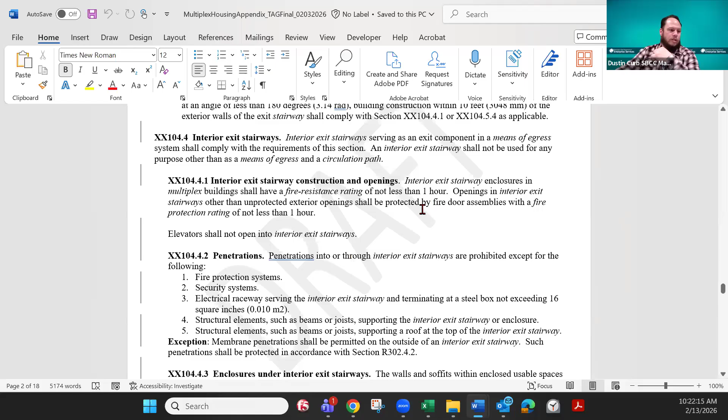Openings in interior exit stairways other than unprotected exterior openings shall be protected by fire door assemblies with a fire protection rating of not less than 1 hour. Elevators are not allowed to open into the interior exit stairways.

Enclosures under the interior exit stairway shall be protected by 1 hour fire resistance rated construction, and access to the enclosed space shall not be directly from within the stairway enclosure.

Exterior exit stairways serving as an exit component for multiplex buildings shall comply with the requirements of this section. The open side serving as an element of required means of egress shall be open to not less than 1 side except for required structural columns, beams, handrails, and guards. An open side shall have not less than 35 square feet of aggregate open area adjacent to each floor level and the level of each intermediate landing.

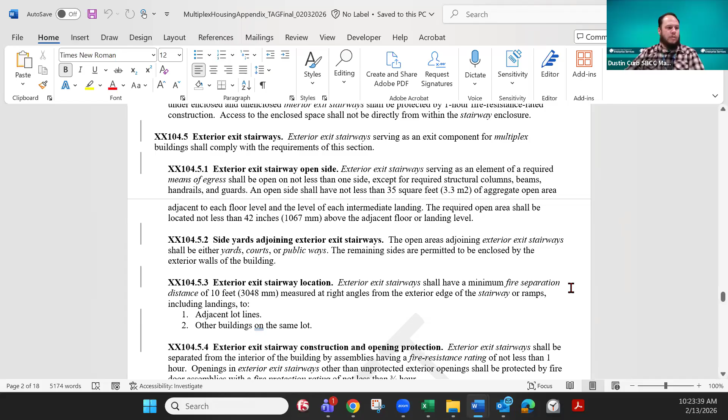The required open area shall be located not less than 42 inches above the adjacent floor or landing level. The open areas adjoining exit stairways shall be either yards, courts, or public ways. The remaining sides are permitted to be enclosed by the exterior walls of the building. The exterior exit stairway shall have a minimum fire separation distance of 10 feet.

Measured at right angles from the exterior edge of the stairway or ramps, including landings, to adjacent lot lines or other buildings on the same lot.

Exterior exit stairway construction and opening protection shall be separated from the interior of the building by assemblies having a fire resistance rating of not less than 1 hour. Openings in exterior exit stairways other than unprotected exterior openings shall be protected by fire door assemblies with a fire protection rating of not less than 3/4 hour.

Where a vertical plane projecting from the edge of an exterior stairway and landing is exposed by other parts of the building at an angle of less than 180 degrees, the exterior wall shall be rated in accordance with this subsection.

The open space under the exterior stairway shall not be used for any purpose. Usable space is permitted, provided the space is completely enclosed in a 1-hour fire resistance rated construction.

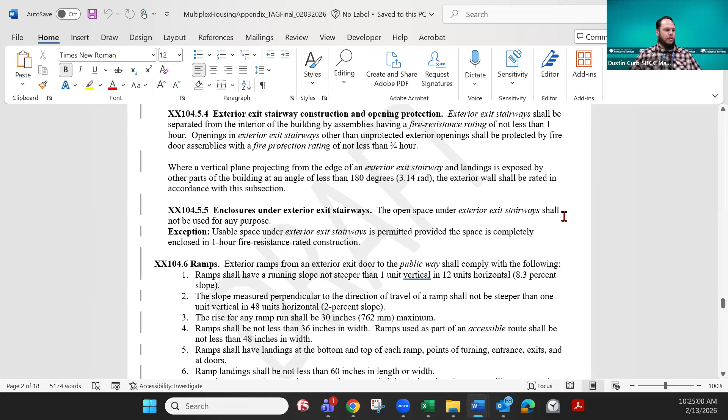Getting to ramps. The exterior ramps from an exterior exit door to the public way shall comply with the following. Not have a slope steeper than 1 in 12. The slope measured perpendicular to the direction of travel should not be steeper than 1 in 48. The rise of any ramp shall not be more than 30 inches. The ramps shall not be less than 36 inches in width. And if they're used as part of an accessible route, they shall not be less than 48 inches.

Ramps shall have landings at the top and bottom. Ramp landings shall not be less than 60 inches in length or width. Exterior ramps and approaches to exterior ramps shall be designed so that water will not accumulate on walking surfaces.

Dustin, if you can take a quick break. In fact, you might want to rest your voice for a little bit as you're reading through this.

I did want to just say that one of the considerations for many of these, so you can see there's a lot of corridor, stair, exitway definitions that can get rather complicated from a code language perspective. That's why we felt like the figures were very important. There were some other things like ramps. Do we need to include ramps in this? And it was one concept that was discussed in many of our different topics was that in a single

unit, a house or a duplex, you are responsible for your space. And with a duplex, there is one other family or entity that is responsible for the other space. Here you have 5 of those. You're responsible for your space, but there are 5 other individual, I'm going to say families, although who knows what that definition would be, and you don't have any control over all of those. So it was felt like, for instance, for the ramps, it was important to put some criteria on there to make sure once you get out of the stairs that you can get to a safe location. So just wanted to add that.

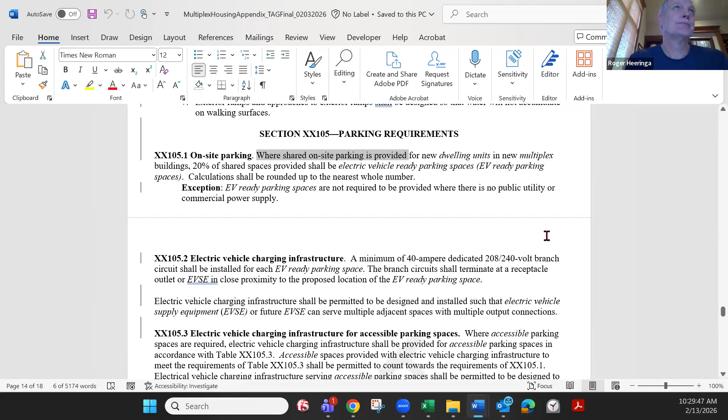Thank you. So similar to some of the stuff in the IRC IBC code language, we talk about the electrical requirements for that. A lot of folks don't feel that we should have any sort of electrical requirement in our realm of enforcement code. But for the EV charging infrastructure, a minimum of 40 amp dedicated 208/240-volt branch circuit shall be installed for each EV-ready parking space.

They shall terminate at a receptacle outlet or an EVSE, which is electric vehicle supply equipment, in close proximity to the proposed location of the EV-ready parking space. The EV infrastructure shall be permitted to be designed and installed such that electric vehicle supply equipment or future EVSE can serve multiple adjacent spaces with multiple output connections.

Scott, go ahead. Just curious, why you guys didn't decide to use the type 1, type 2 chargers versus just specifying that and letting the load work itself out versus putting an exact amperage. So I don't recall type 1, type 2 chargers actually coming into the conversation within this body, but we're trying to take the requirements that were existing in the IBC and the IRC and marry them together. And, like Roger said, we had Patrick Hanks help heavily with the drafting on the EV charging requirements. He was involved in the IBC revisions this code cycle, and I think his contributions were good, but the type 1, type 2 chargers weren't a topic of discussion within this group.

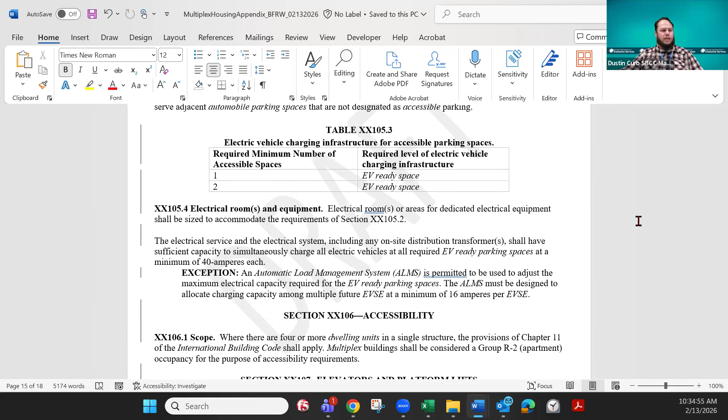Okay, electrical rooms and equipment. Electrical rooms or areas for dedicated electrical equipment shall be sized to accommodate the requirements of section XX 105.2. The electrical service and electrical system, including any on-site distribution transformer, shall have sufficient capacity to simultaneously charge all electric vehicles at all required EV-ready parking spaces at a minimum of 40 amperes each, with an exception that an automatic load management system is permitted to be used to adjust the maximum electrical capacity required for the EV-ready parking spaces. The ALMS must be designed to allocate charging capacity among multiple future EVSE at a minimum of 16 amperes per EVSE. And that is where we're at with the EV charging requirements. There's no other parking requirements within this section.

Let's go ahead and get through, Dustin. Just a minute, Scott. I think we can get through this. I know it's 10:35, but it should take us 5 or 10 more minutes, and then we'll take a break.

Scott, go ahead. Curious on the EV-ready spaces alignment with the accessible. Are we adding this as a requirement essentially? There's already EV requirements, but are we basically tying it to accessible and essentially doubling the requirements? I don't believe so. Yeah, there was talk about that. The intent is no, and I believe currently the way it is written, they are not additive. And even in 105.3, it says where accessible parking spaces are required.

So Scott, certainly go through this with a fine-tooth comb. It's very good to have somebody who hasn't been deeply involved in it kind of read through and make sure they understand. We believe that this is not additive, but if you can look through that and come up with a clarification, or if it's not clear to you, I think assuming this gets through the BFRW, we can have that conversation at the full council meeting next Friday, where we'll be going through it. So, okay, sounds good. Yeah. And if it is considered additive, that is not the intent. Right.

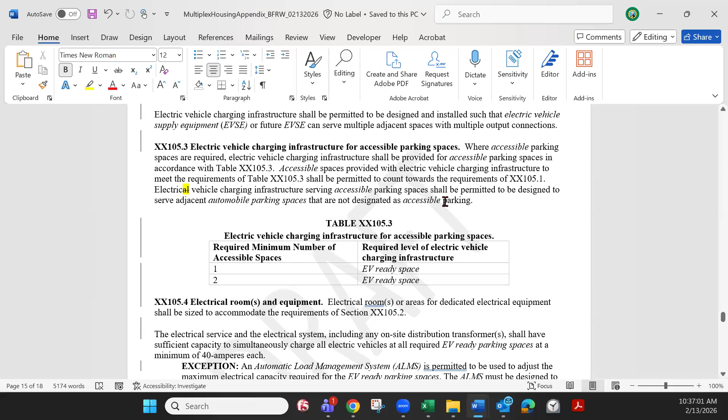John? I think the language is right in the fourth line of 105.3, shall be permitted to count toward the requirements. Yeah. There. I think that's where we clarified that. Yes. Thank you. Thank you, John.

All right, accessibility. Where there are 4 or more dwelling units in a single structure, the provisions of Chapter 11 of the International Building Code shall apply. Multiplex buildings shall be considered a Group R2 occupancy for the purposes of accessibility requirements. So trying to keep this as streamlined as possible to maintain the presence in the International Residential Code text. This is another one that we didn't feel we could bring the requirements over, but instead point it over to the IBC.

Elevators and platform lifts. This one was a bit of a topic. We did have a guest speaker from L&I attend the meetings to talk about elevator requirements and the standards that they are using. So elevators where provided in multiplex buildings for common use: passenger elevators, limited use and limited application elevators shall comply with ASME A17.1 and CSA B44. There's no change to those standards as adopted in any other of our text areas, and it is also aligned with what the L&I elevator program is currently using.

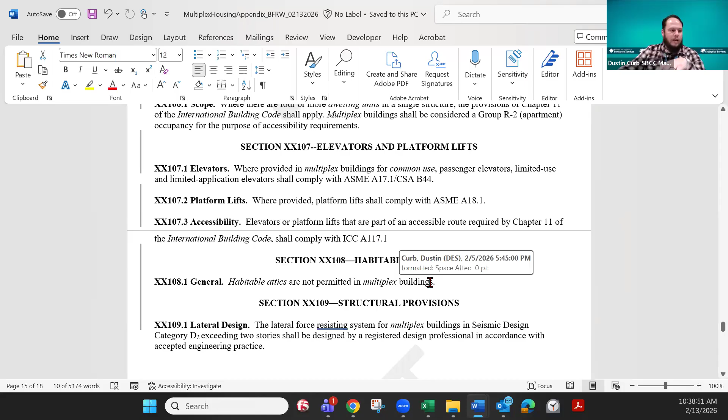And these elevators that we were talking about are for the common use. So if they're outside of a dwelling unit; anything that's within the dwelling unit is a little different and has a different code text to point to. Where provided, platform lifts shall comply with ASME A18.1. Elevators or platform lifts that are part of an accessible route required by Chapter 11 of the IBC shall comply with ICC A117.1. And pretty much, go ahead.

If I can just point out, Dustin, sorry if I interrupted. These are where provided. We are not requiring that you put elevators in these, but if you put them in, then you need to meet these criteria. And also to just characterize a little bit more, the common use elevators are stretcher size elevators and accommodate a stretcher. The ones within a dwelling unit are not required to be stretcher capable cars. Is that a

I am not sure that that's correct. John, do you know? Well, I think the intent was that we were not going to require them to be stretcher size. Yes. Because the IRC doesn't have the requirement for stretcher size, the fact that we're silent on it says that we're not requiring them. Okay. So then my statement was wrong that there's any stretcher requirement on these; all the elevators in the IRC are not required to be stretcher size elevators. That is correct. Okay, thank you.

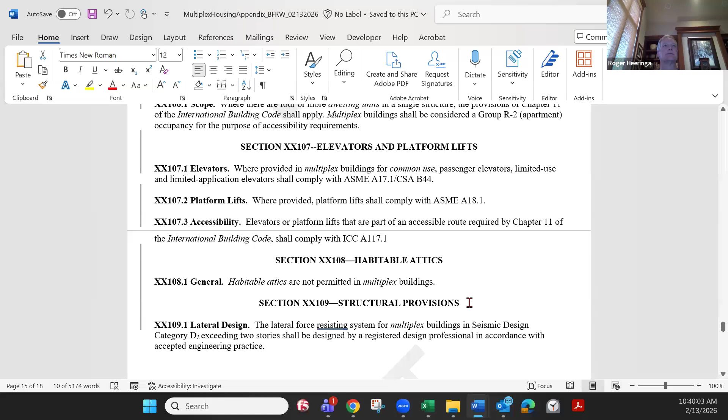Getting to habitable attics: they are not permitted in multiplex buildings. Structural provisions, lateral design: the lateral force resisting system for multiplex buildings in seismic design category D2 exceeding 2 stories shall be designed by a registered design professional in accordance with accepted engineering practice. And that is the end of the code text. All right, I'm going to ask for any questions.

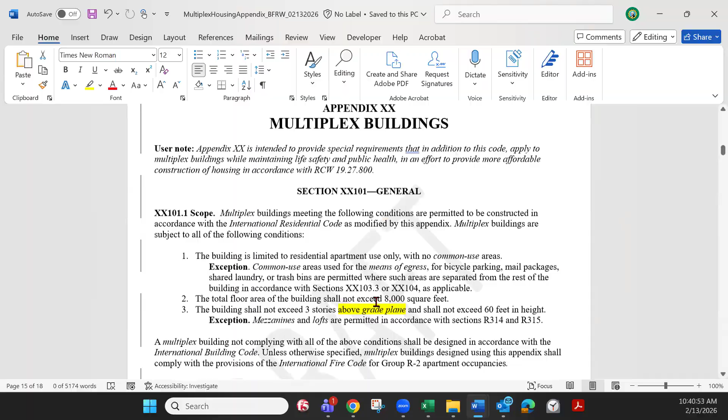Attendee Ken, go ahead. Okay, I know this was discussed during the TAG, just with the definition of multiplex at the very top, and just making sure. I think this was the decision that was made, is that I can have a 3-story building, which is 2 stories above grade plane and a basement. I can have 3 stories, which is 3 stories above grade plane, but I cannot have 3 stories above grade plane and a basement, because that would be considered 4 stories.

Thank you for bringing that up. That was the one other flag that I had that we needed to discuss. And maybe what I would like to do is introduce that and then go ahead and take a break. We're more than halfway through our meeting.

And we do need to talk about that at this BFRW committee meeting. This issue was brought up at our last meeting. The way it is currently written, it is 3 stories above grade plane.

There are some figures, and Dustin, I don't remember where those came from at our meeting. I think in one of the codes. They were in the IRC commentary, on the definition of grade plane and story above grade plane.

So let's after the break, make sure we can pull those up so people can see and understand them. The way it is currently written is 3 stories above grade plane, which means you could have basement levels in addition to the 3 stories above.

Well, that's why we have to debate that, because the definition of multiplex doesn't say above grade plane. Right, and the above grade plane is, yeah, so that's what we need to debate and consider.

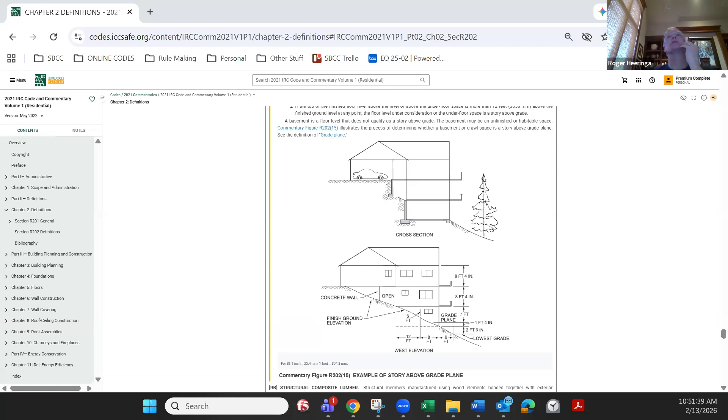So Dustin, I guess I would ask you to walk through the grade plane conversation. In the figure that, so go ahead. I guess to talk about the stories above grade plane, we need to know what the grade plane is and some other definitions.

So I duplicated here. If we get into the definition of grade, there's a lot of commentary here from your scroll by, so just give me a moment here. So we have grade, the finished ground level adjoining the building at all exterior walls.

I think that seems pretty straightforward, but really what we're looking for is the grade plane. The definition of the grade plane is a reference plane representing the average of finished ground level adjoining the building at all exterior walls. Where the finished ground level slopes away from the exterior walls, the reference plane shall be established by the lowest points within the area between the building and the lot line, or where the lot line is more than 6 feet from the building, between the structure and a point 6 feet from the building.

So suffice it to say, in the picture that we were looking at, the grade plane is not necessarily defined by the line across the building, but where we're counting the stories above grade plane is going to be at the kind of median mark of the grade along the wall and within 6 feet from the wall. So this picture that we're showing is just a cutaway showing the line right up against the wall.

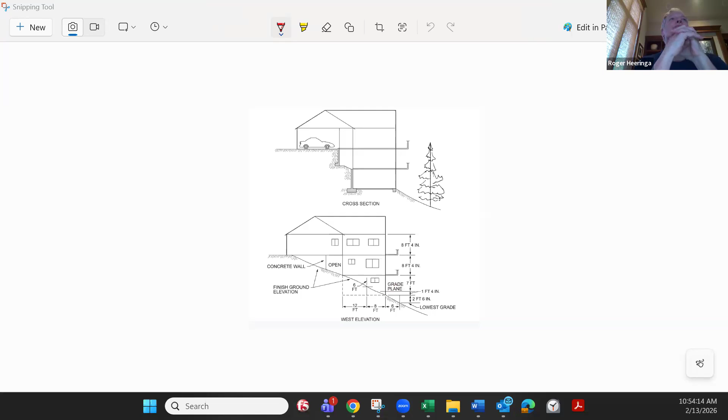Okay, so as we run back through definitions, anybody feel free to jump in and help me get us across to what a story above grade plane actually is. We've talked about the grade plane. Let's go to the definition of story above grade plane.

Sorry for using such small stuff, it's just so I can get the whole diagram on the screen at once. A story above grade plane is any story having its finished floor surface entirely above the grade plane, which seems pretty obvious. This middle story is the floor entirely above the grade plane.

Or, in which the finished surface of the floor next above is either more than 6 feet above grade plane, or more than 12 feet above the finished ground level at any point. I don't think that particular provision is depicted in this graphic here. I guess I don't have a good way to blow that up. Let me just go back to the website here.

So looking in here, going back to that: more than 6 feet above the grade plane, or more than 12 feet above the finished ground level at any point. Right here, we're less than 6 feet above. If this was more than 6 feet, this would be a story above grade plane. But right now, this is a story below grade plane. Is that an accurate statement from those on the call?

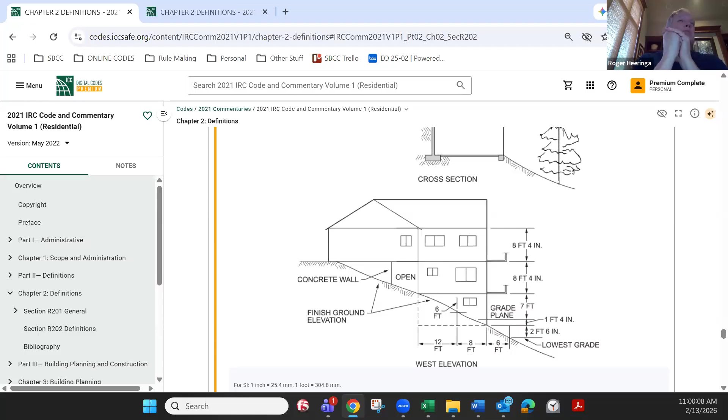Okay, thank you John. And I want to remind everybody, if it gets too complicated and you get a very steep site, you can always build this as just build it out of the IBC. So complicated maybe means this doesn't work in the IRC and you have to go to the IBC.

Scott, go ahead. Just wanted to say that I agree with Angela on this one. I think that keeping it as written makes sense. Okay, other comments? Richard, go ahead.

Thanks, Roger. So if we leave that language above grade plane, as was brought up in our last meeting, that means we're silent on basements, unless we put something in that limited it to one basement level. That's right. Yep.

And Dustin, if you can go to the picture again - Scott's got his hand up. There was discussion from the fire folks, and Dan, I'd ask for your knowledge on this one, but there was conversation about fire access in that situation when you're on a hillside and reachable. Yeah, it comes down to ladder access.

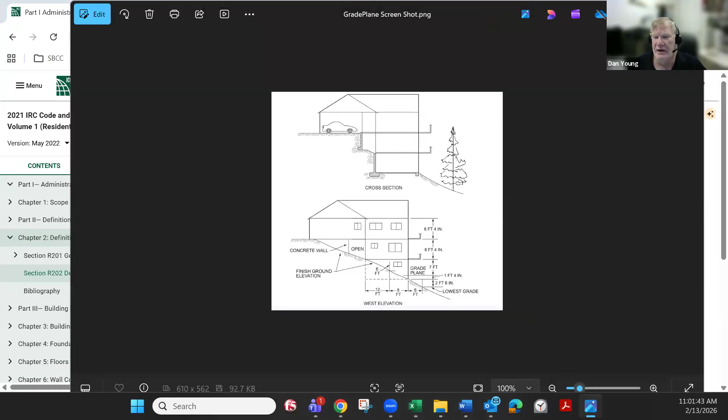So if you have the one there that's showing and our road is up at the top, if the road's at the bottom, we have to have the aerial apparatus requirements hit that, we have space to put out the outriggers and that kind of stuff. So that's our concern if we get too tall there, and let's say the fire's on the left, and everybody has to exit out the right, and then we can't get a ladder truck up. That's the concern.

We always look at the worst case scenario. But yeah, that's where we're looking, because especially if it's a real steep slope where you basically would have two basements, we may not have adequate access.

Dan, in the IRC, EEROs are required in bedrooms, is that correct? Yeah, in the IRC, yes. And I think I'm right on that, right, Angela? Yeah. Yes, you are. Okay. I don't want to go into it - I'm fairly good with the code, but I want to defer to the experts on that. But yes, EERO is required.

I will remind everybody there was conversation about the EEROs in the 6-story single exit condition. What happens even if you have 6 stories, but you don't have fire truck access? Should you require EEROs there? And the thought was, if you are a resident and you're thinking ahead and having a rope ladder available for exiting, that got some folks comfortable as a reason why we required EEROs on all bedroom windows, even on the 6th floor of the single exit.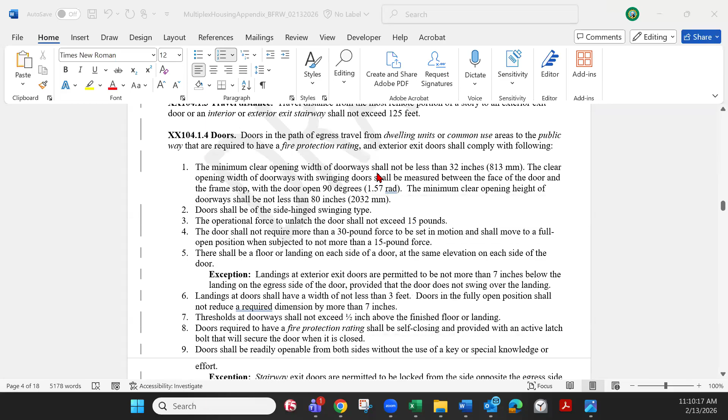I see Marcus, go ahead. Sorry, I had to hop off for a work meeting and I'm just coming in. Just wanted to check, was this kind of the grade plane conversation the only thing? There was one editorial, a word, electrical, that should have been electric. That's changed down below, and now we are debating the grade plane question.

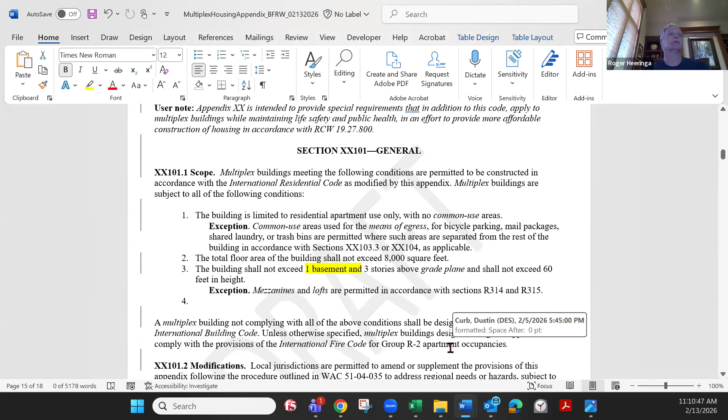I'm going to go out on a limb and say we are heading towards allowing a basement. Yeah, there's the one editorial that got caught by Patrick. We are heading towards keeping the grade plane language, allowing basements, but limiting it to 1 basement level, so you don't get into that more complicated situation where you're 2 basement levels and that kind of thing. That's what Angela said—you're then moving towards having to go into the IBC to design.

Thanks John, for catching me up. Yep, sounds good. Yeah, thanks, Marcus.

John, the only question I have is whether we also then would need to modify the definition, because right now it just says 3 stories, which would include basements. Yeah, the multiplex, up to 3 stories and 1 basement. I don't know if you want it 3 stories above grade plane and 1 basement. Do we need to reflect the same language? Someone might say that by definition it's only got... If John, if we just added above grade plane there, a building up to 3 stories above grade plane, and in this definition we're silent on basements, but then we limit it to 1 basement level down below, would that work?

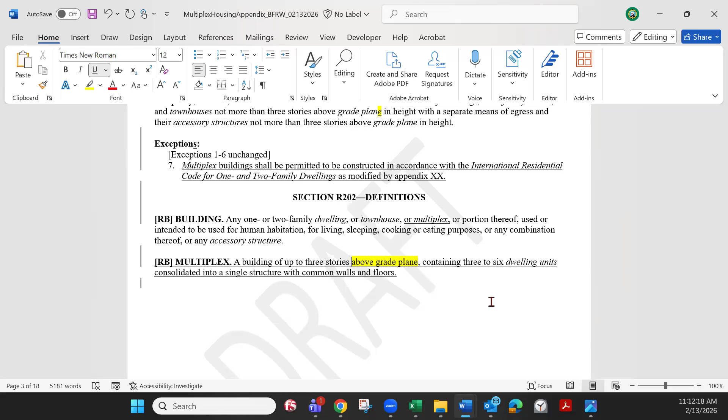Yeah, sorry, just real quickly, do the other terms, like townhomes and other stuff, have in their definition an above grade plane reference, or is it just 3 stories? Because I guess I'm thinking the other building types in IRC also have this kind of allowance for the basement. It probably doesn't matter either way—I guess this makes it very clear and just matches the same thing, but that was just something that popped in my head in terms of maybe having somebody quickly look up the definition of two-family or townhome. Okay, played right there: not more than 3 stories above grade plane.

Great, Angela, can you answer that question, or do you have something else? Yeah, no, that's what I was just going to say. I had the section, this same thing, where it's the scoping for the IRC, where it says all of the structures that can be in there, and it limits them to not more than 3 stories above grade plane in height.

So, Marcus, responding to your question, if the IRC allows 2 basement levels for a duplex or single family residence, in this case we're allowed one or 2 dwelling units. This is 6, so having the more restrictive limit of only 1 is prudent. I think Angela answered my other question too, which is above in the scope it says above grade plane, so we can just match that and say above grade plane in the multiplex definition.

All right, other comments, or is somebody ready to make a motion? All right, so we're looking to move this to the full council for approval. Is that right? Yes, that is correct.

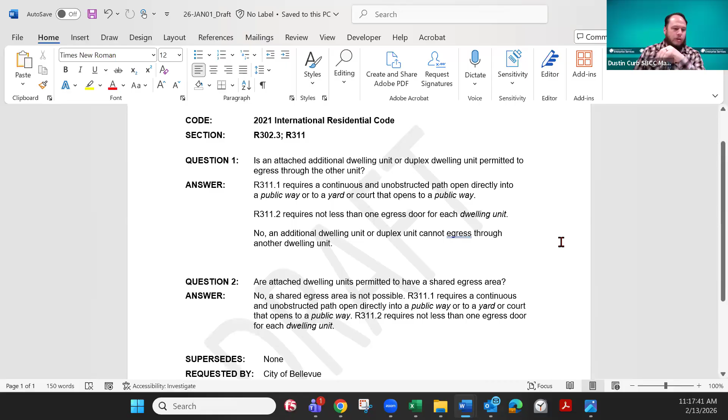But when you look back to R311.1, it requires a continuous and unobstructed path to an opening directly to a public way, yard, or court that opens to a public way. And with addition of R311.2, it requires not less than one egress door for each dwelling unit. So even though in our previous opinion the common spaces are allowed, the shared entryway, I think based on just the straight code reading, doesn't allow for shared egress.

I could see a fantastical configuration where you have the shared egress space and then the two required egress doors are within that same space, and you can come out into the same space and use two doors. But I don't think that's the desire folks are trying to install here. So my draft answer for this one is that no, a shared egress space is not possible with the consideration of R311.1 and 311.2.

I'll pause - Angela, you have your hand up? Actually, Dustin, nope, can you clarify? So this is a request to respond to these questions for the 2021 IRC, correct?

Correct. Okay, just wanted to clear that up. Angela, go ahead. I'm just gonna say, yeah, the code may specifically say that, but I'm just gonna say that we do it a lot where there's a vestibule situation in the front, especially with split levels, duplexes that are stacked or something like that, where you have one common entry and they go up and down, or especially when you add any of those. So I'm just gonna say we do it.

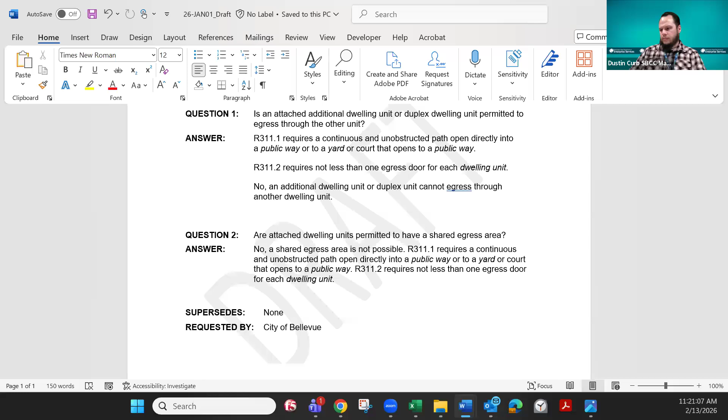I guess, Dustin, if I were to be asked to make a decision, I would want to look at 311.1 and 311.2 to see exactly what that language says. Okay. Let me pop that open for you guys. And I have a hand. Micah, go ahead. I'll let you guys finish. I mean, it might get my questions answered. Thanks. Okay. I'm sure you'll have an opinion, Micah, so feel free to let us have it whenever you would like. And so we are still viewing the commentary here, but actually what I need to do is show you guys the Washington State Code.

All right. So 311.1, means of egress. Dwellings shall be provided with the means of egress in accordance with this section. The means of egress shall provide a continuous and unobstructed path of vertical and horizontal egress travel from all portions of the dwelling to the required egress door without requiring travel through a garage. The required egress door shall open directly into a public way or to a yard or court that opens to a public way.

And then in conjunction with that one, the egress door, 311.2: not less than one egress door shall be provided for each dwelling unit. The egress door shall be side hinged and shall provide a clear width of not less than 32 inches measured between the face of the door and the stop with the door open at 90 degrees. The clear height of the door shall be not less than 78 inches in height measured from the top of the threshold to the bottom of the stop. Other doors shall not be required to comply with these minimum dimensions. Egress doors shall be readily openable from the inside of the dwelling without the use of a key or special knowledge or effort.

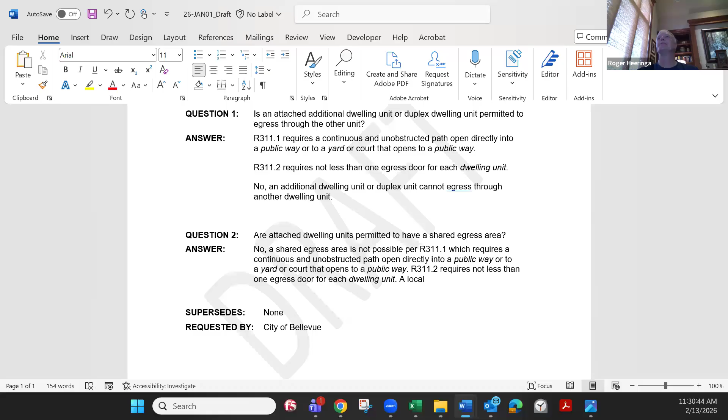Thanks, Roger. I agree with Dustin on question one, which is asking, is it permitted to egress through another unit? That answer is clearly no. However, I believe on question two, the answer would be yes, you could have the shared egress, especially with the changes, as Angela indicated, that came in this cycle in the 2021 under R302.3, including 3.4 and 3.5, where you've got opening protection. You can actually have openings between these two units as long as they're protected.

So I would clearly agree with Angela that I would allow a shared space that you could then egress from, as long as you're providing those opening protectives per R302.3.5 for shared accessory rooms. I know maybe they wouldn't call it an accessory room, but I think the answer to number two should be a yes, you can, per some of the added language that Washington has included in the 2021 code. Thanks.

I'm looking at that too. Thank you, Micah. That kind of moves the needle on my opinion a little bit. So could we draft a response? What would the draft response say, given the Washington code amendments in R302.3 that allow for shared accessory rooms?

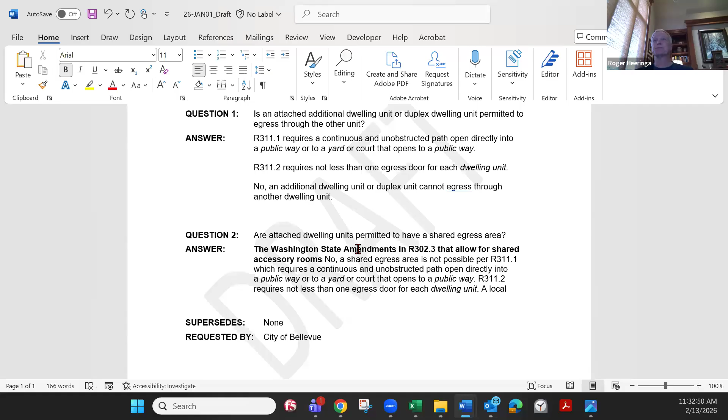That the answer is yes, you can egress into a shared accessory room, assuming, and I have not read all of 302.3, as long as it meets the criteria in 302.3. And that's specific to two-family dwellings, not townhomes. Not what? Not townhouses. It's specific to two-family dwellings. Oh. I mean, it would be kind of tough to get townhouses with a common exit. I'm sure they could figure a way, but the shared accessory rooms is under the two-family dwelling section.

Can you clarify for me the difference between townhouse and two-family dwellings? Townhouse is 3 or more units that each have 2 exposed sides. So basically a row or a U or an L of attached dwelling units. Right. Any number can still be in the IRC as long as every unit has at least 2 walls that are exposed. And then what is a two-family dwelling? Duplex. It's a duplex, and it can be stacked or side by side, but it's limited to 2. As soon as you go to 3, then it falls under townhouses and those requirements.

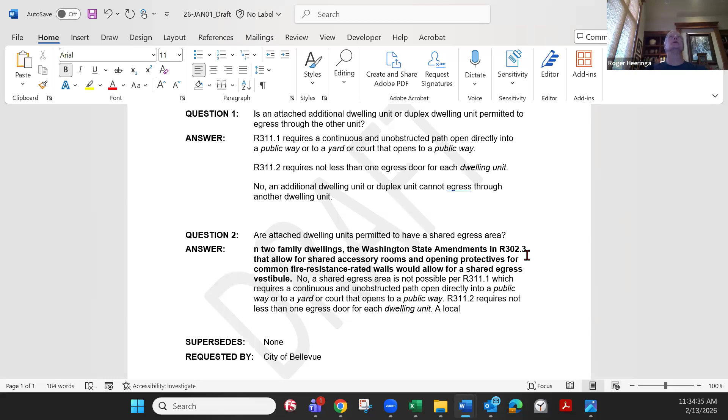So your suggestion, the answer would be yes for two-family dwellings per 302.3. For townhouses, the answer would be no because of 311.1. Micah, go ahead, but Micah might tell me I'm wrong. No, I'm not going to tell you you're wrong. I'm actually going to tell you you're right. And I think the simple add is the townhouse, by definition, the townhouse unit is defined as a single family, where technically 302.3 is about two-family dwellings.

And just one more modification there, Dustin, in question 1, we may want to state two-family dwelling and not duplex, since we should be pointing to 302.3 for criteria. Just a thought, because technically duplex is not in the IRC. But I agree with you, Angela. Yeah, two-family dwellings. Okay.

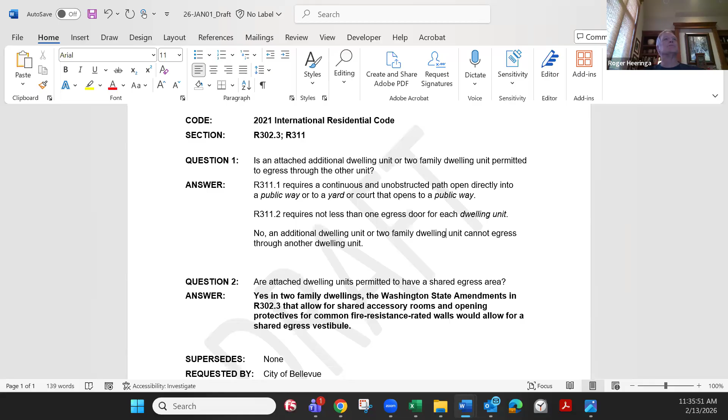Todd, go ahead. So then in the answer for 2, I agree with yes for the two-family dwelling. Do we need to address townhouses though? Because those are technically attached dwelling units also, correct? And I don't remember how the question was originally asked. Is that how the question was asked though? I can pull the question request as posted for the meeting. It says is an ADU or duplex dwelling unit permitted to egress. But we do have the liberty of crafting the question so that the answer is more code accurate. I don't think you need the word attached.

Chair, may I? Yeah, go ahead, Todd. I guess I would prefer that we just be complete and cover everything, including that in the 2024, the intent is to also define corridors in the multiplex. Just lay the whole spectrum out there and give a useful opinion.

Angela, go ahead. I mean, don't put the 2024. That's speculating on what action is going to be taken. Yeah, that's what I was going to say. The problem is that's how my mind is working right now. Yeah, because this is an opinion on the 21 code. Correct. So it's the current. And I'm sorry, can you read the question again that they submitted, Dustin? Yeah, one moment.

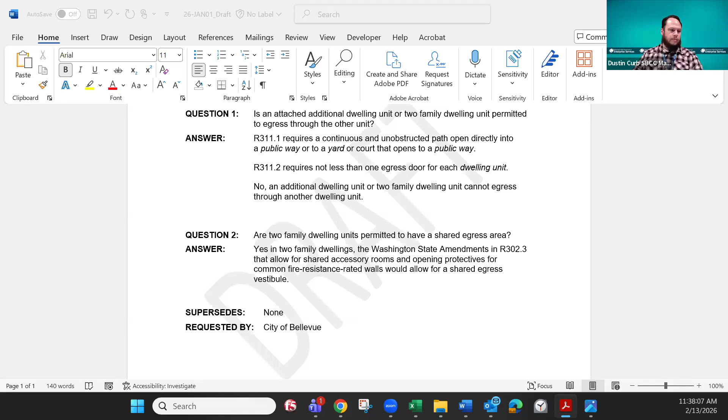Okay, so the question is referring to two-family dwelling units. I don't think we need to address townhouses, in my opinion. I agree with you. I'll throw out an agreement on that. I think if we get into adding other topics, the SBCC would get into more commentary or interpretation, which may not be accurate, especially since the question is not about 3 units, it's about 2 units. And that answer may change if the question is, can we have 2 attached ADUs and then egress through a common space? That may be a completely different answer based on code language.

Okay, Todd? Yeah, I'm okay with that. That makes sense. Okay.

So are we ready as a BFRW committee to make a motion and approve these answers, thereby precluding a discussion at the full council meeting next Friday?

I move that the BFRW approve this interpretation draft as shown on the screen. Thanks, Angela. I'll second that. Tom? Thanks, Tom. Any other discussion? Hearing none, all those in favor say aye. Aye. Aye. Any opposed?

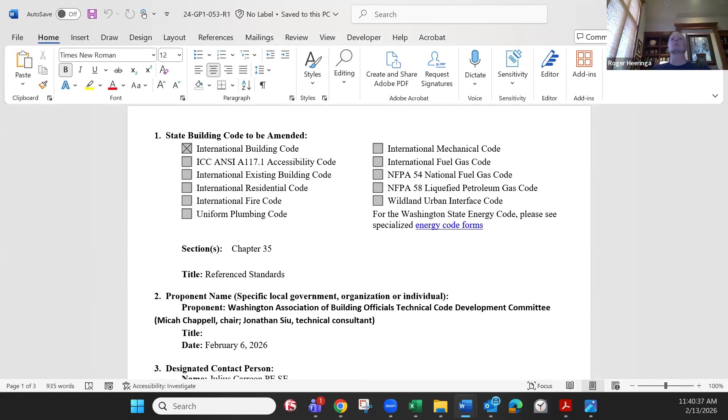Specifically Julius with the City of Bellevue, but I think it comes from, the proponent is actually WABO. Now I'm stumbling. The code change proposal suggests that we approve ASCE 7-22, minimum design loads and associated criteria for buildings and other structures, with supplement number 1 and supplement number 2.

Supplement number 1 provides approved revisions to the standard requirements in advance of the next edition, ASCE 7-28. The revisions are generally intended to clarify the intent of the requirements and correct reference standards and documents. So WABO supports really just including supplement number 1. It updates, it clarifies some things, making sure that we include that in the 2024 code adoption.

Supplement number 2, however, brings in flood hazard areas, and it basically requires that for buildings in risk category 2, 3, and 4, you have to consider in a flood hazard area if you are in the 500-year floodplain rather than the 100-year floodplain. That would have a number of different impacts throughout the code, probably some impacts on even zoning code questions, maybe insurance questions.

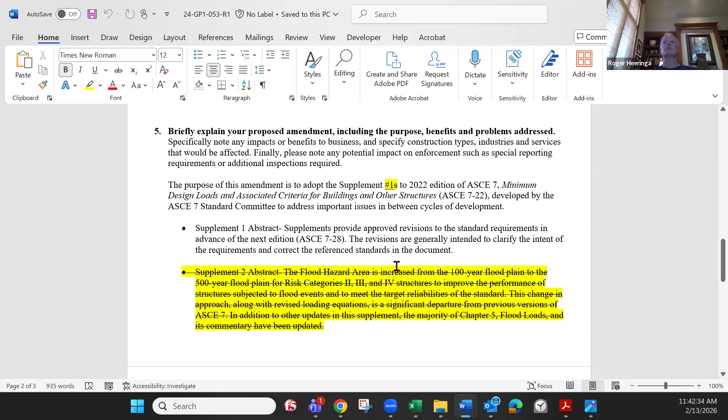So WABO has requested withdrawing the request to include supplement number 2. The proposal in front of us is to modify 24 GP1 053 revision 1 to exclude supplement number 2, but keep supplement number 1.

And Dustin, I do have 2 edits. Did you? Oh, you did cross out the S's. Okay, I saw that in number 1. So Micah, you're on WABO.

I don't know if there's any other, if you want to present anything, expand on my explanation. No, I don't have anything to expand. I appreciate it. We definitely don't want to drive any additional costs for this advanced adoption of supplement 2 that would increase that floodplain area to the 500-year risk category. So, definitely want to strike that, at least for that reason.

Thanks. John? Yeah, I think part of the reason also we're withdrawing is that there's some other coordination that has to happen with ASCE 24, which also governs design in flood hazard areas, and we hadn't done that part of it. The idea is that ASCE 7 and ASCE 24 have to kind of go forward together, and we hadn't done that coordination work. So that's the other reason for doing that.

Just as a note for people's information, the 500-year floodplain supplement 2 is working its way through the ICC/IBC process for adoption in the 2027 code. We are just not going ahead and pre-adopting it. There's a mix of how it's going through, but right now most of it has been approved so far. Okay, thanks for that additional info, John.